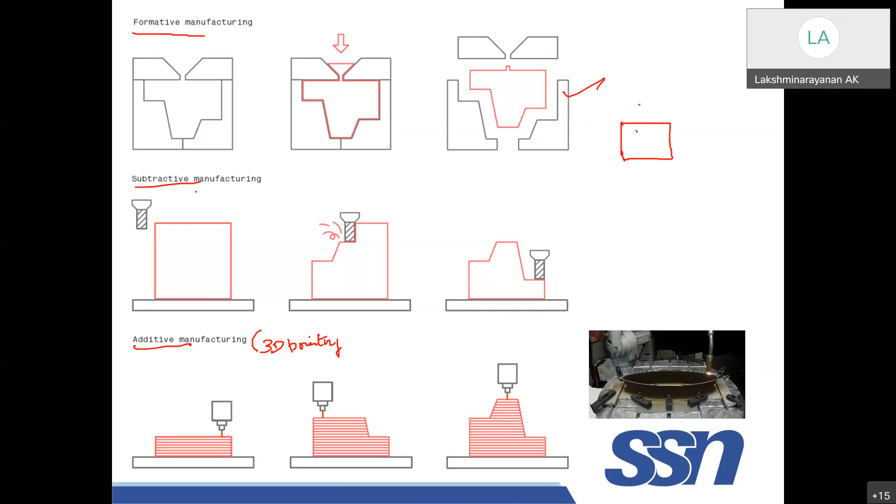Subtractive, you will take a bulk material like this. You will be using a tool and just remove the excess material, whatever you don't want to have. Suppose these areas, the material is being removed using a tool, right? Usually this is a milling cutter, which is used to remove the excess material, right? Whatever the profile you want, you just remove the excess material. This involves a lot of scrap, right? There is a lot of waste, which will accumulate.

For example, if you take magnesium alloys, suppose I want to fabricate a component using a magnesium alloy. If you have a lot of scrap material, there is a problem. Especially magnesium alloys will catch fire when in powder form. So retaining the scrap itself is a big issue, in addition to the waste production.

Whereas in case of additive manufacturing, as you heard a lot about 3D printing in the last few days, we will be constructing or fabricating a product layer by layer, just by programming the path of the tool. You will melt the feedstock, which may be powder or wire, layer by layer to construct the material. Though it is called near net manufacturing, you will still have some waste, but it is so much reduced. That is the advantage of 3D printing or additive manufacturing.

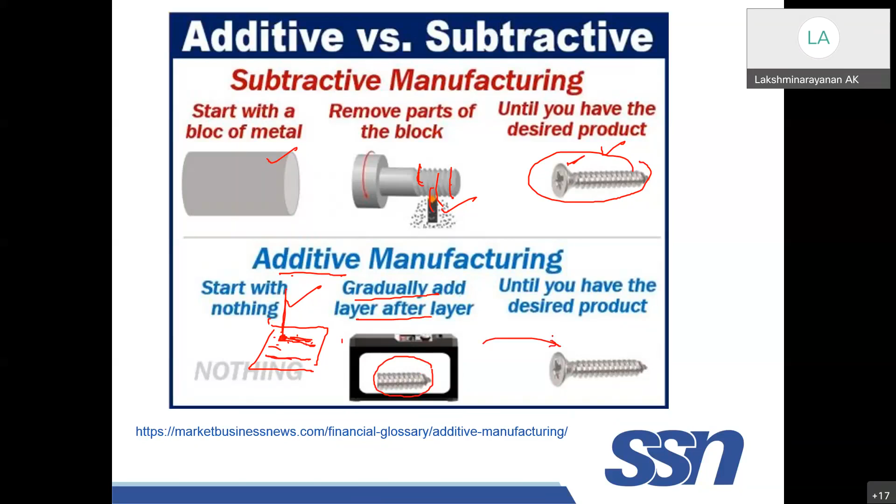But in case of additive manufacturing, you start with nothing. You have a substrate over which you can place some powder and melt it using a laser; that is called laser powder bed fusion. Or you can also use some kind of wire, which is melted and deposited as a layer. Gradually you add layer by layer until you end up with the product. That is why, adding layer by layer, it is called additive manufacturing.

If you take the volume of research done by researchers, most of the additive manufacturing papers available are majority on non-metallic materials. Non-metallic materials are very common, but in recent years people have started, and it is gaining importance for metallic materials.

If you take metallic materials, there are four categories: powder bed fusion, directed energy deposition, binder jetting, and sheet lamination.

In powder bed fusion, it's very simple: you have a cavity, you put some powder, and use a laser to melt a layer. That layer is melted, then you spread more powder on the next layer and melt it again, constructing the part layer by layer. Here the source may be laser or EB, electron beam - a beam of photons or electrons can be used for melting. The feedstock here is metal powder.

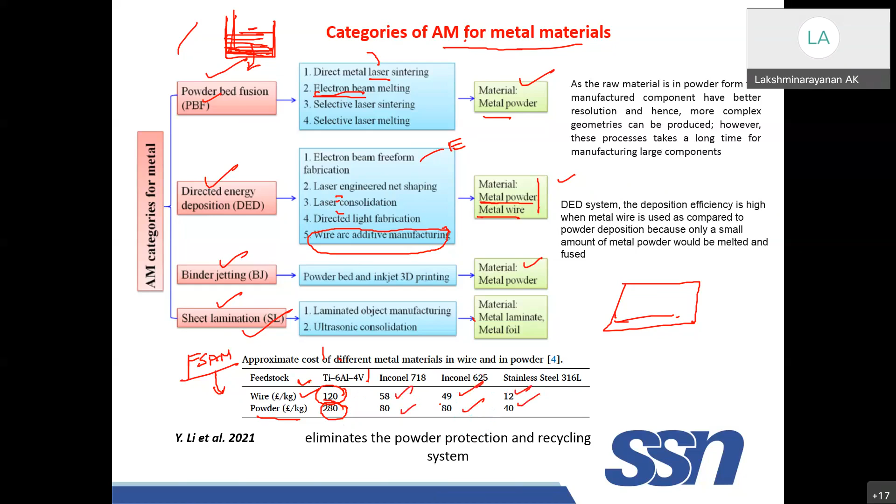Similarly, in other alloys also, the powder cost is so high when you compare the wire. Not only the cost, but also the recycling. When you produce the powder, the energy spent during powder production is so high. So the deposition of wire will be somewhat better.

So if you see, there are several techniques. If you want to compare these processes, you have to consider two factors.

One is deposition rate - how much gram you are depositing per hour, right? This is in the y-axis. And minimum feature size - what is the feature size you can fabricate? If you consider this area, this quadrant, up to this point, you can

use powder bed - you can use laser source or electron beam. Since you are using powder and a very concentrated source, the feature size also is somewhat less. The deposition rate also is less when you compare to other processes. But the surface finish will be very good - that is the advantage in case of powder bed fusion.

In case of laser LMD also, somewhat it is higher. Arc based, you can still go for a higher deposition rate. The feature is also bigger size. And there are other welding techniques in which you can deposit more - you can do large scale manufacturing. Large deposition is possible in case of arc welding, and the feature size is also very big.

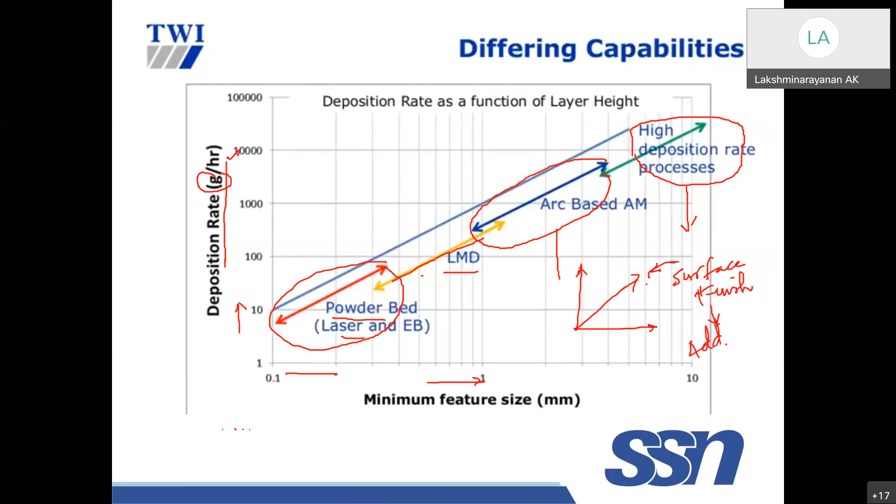But when you increase the feature size, and if you go this way, as in the diagonal, your surface finish becomes somewhat poor, and you need additional machining. That is one of the drawbacks of high deposition rate.

Wire arc manufacturing - I will concentrate more on wire arc additive manufacturing initially, then I will move on to friction based additive manufacturing. If you take wire arc additive manufacturing, it comes under directed energy deposition process.

In this case, we will be using a metallic wire, which will be supplied at a particular rate, a constant rate that we can vary and play with. Here the metallic wire will be completely melted, and it will be deposited on the previous layer. That means, initially this is the substrate, so the initial layer will be deposited using a wire, with a heat source, with the arc.

Maybe, based on the welding process, your wire will be melted - the arc will be created between your wire and the substrate, or sometimes between your non-consumable electrode and your substrate, and the wire will be fed externally. That we will see.

So wire arc additive manufacturing means you will be using a wire, you need an arc source, a heat source by means of any of the welding processes. So this wire will be melted and it will be deposited. First layer will be deposited, then again the torch will be lifted up, and another layer will be deposited. Like that, you can keep depositing.

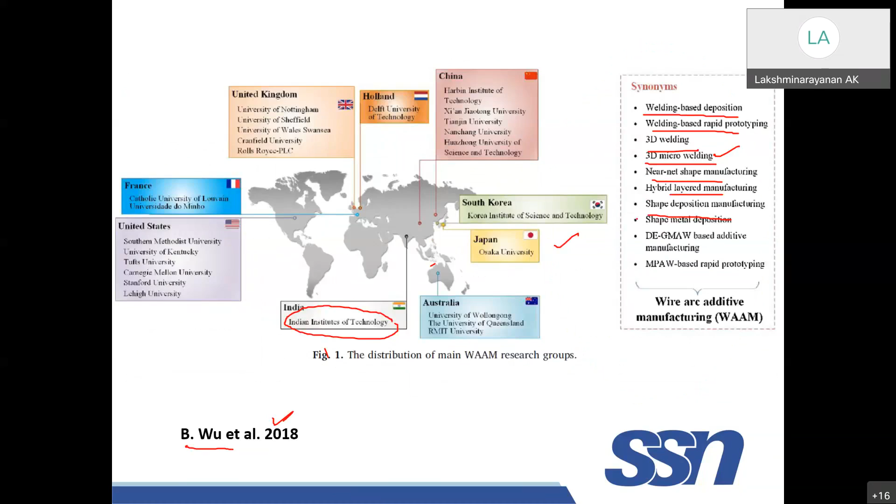Later, initially we will try to understand what are the variants of wire arc additive manufacturing.

At a later stage we will see solid state additive manufacturing techniques like rotary friction welding based, linear friction welding, friction surfacing, friction deposition, and friction stir additive. This is very popular now with respect to the product. Additive friction stir is a patented process by Aeroprobe. Now there is a company called Meld who are also working on that. We'll see that.

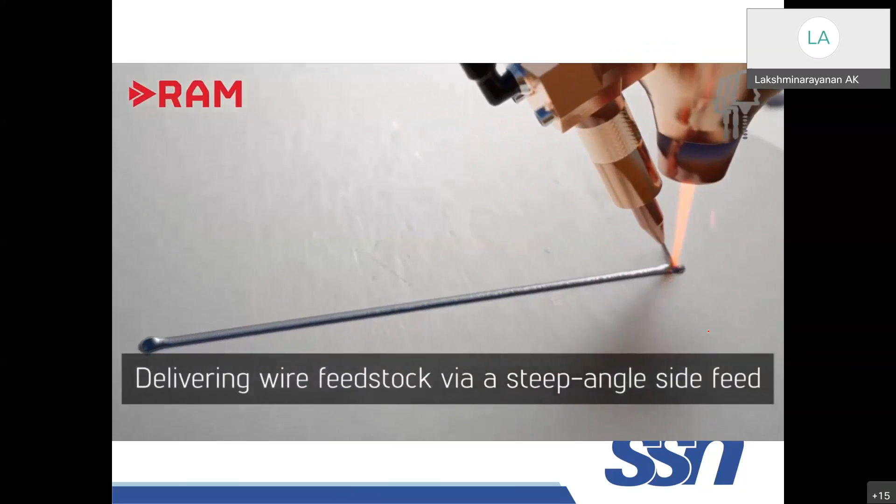So this is a laser. The wire is fed here, and with the laser they are able to melt it. This is initially a multi-track single layer. Once the single layer is over, if you want to build continuously, you can build it.

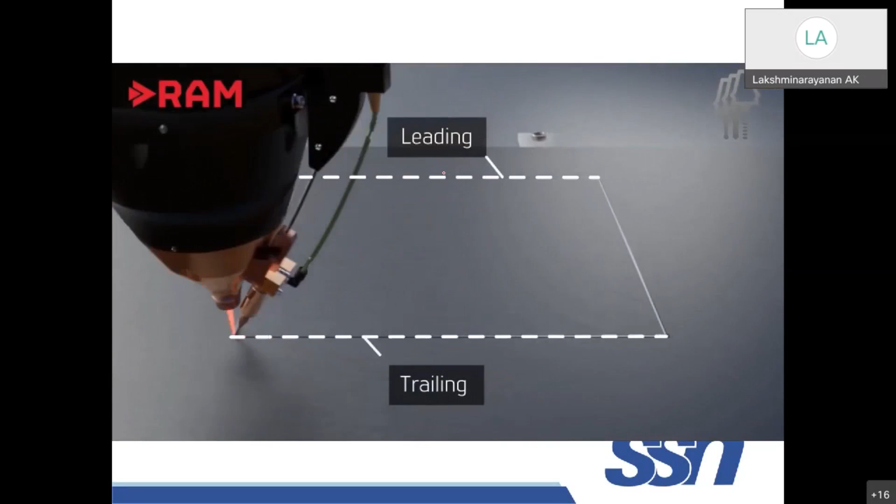So your wire is fed. This comes under directed energy deposition. We will be using laser to melt - the heat source here is laser.

You need to decide what overlap you should have, because between tracks, to avoid porosity, usually the overlap is provided.

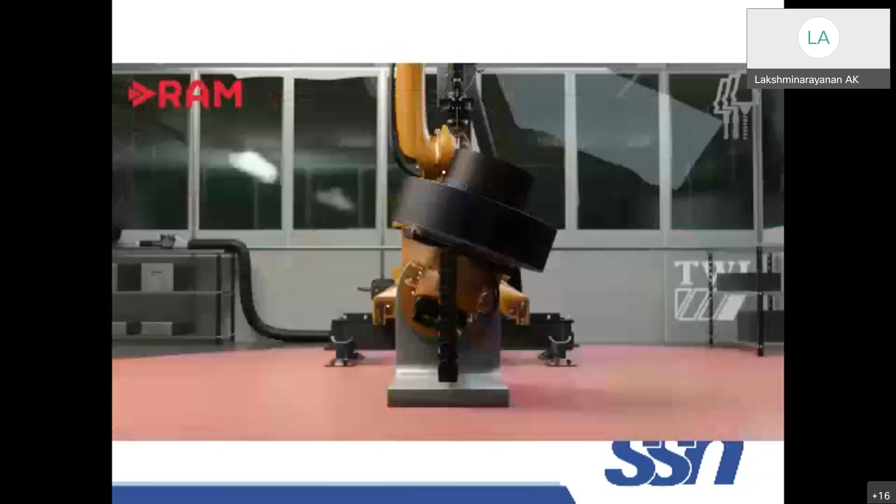For any contour shapes or any shape you want, you just prepare a CAD model, create the path, then you can move the laser source wherever you want, whatever shape you want.

The problem here is that if you use laser or electron beam, the energy used will be very, very high compared to arc power. That is why people want to use the WAAM process - wire arc additive manufacturing. That is one reason. Another is energy consumption: compared with laser and electron beam, it is 1/10th of laser and 1/30th of electron beam generator. That is one of the biggest advantages of WAAM when you consider economy.

The other aspect is large metal deposition is possible - the deposition rate is very high in case of WAAM. That is also another advantage.

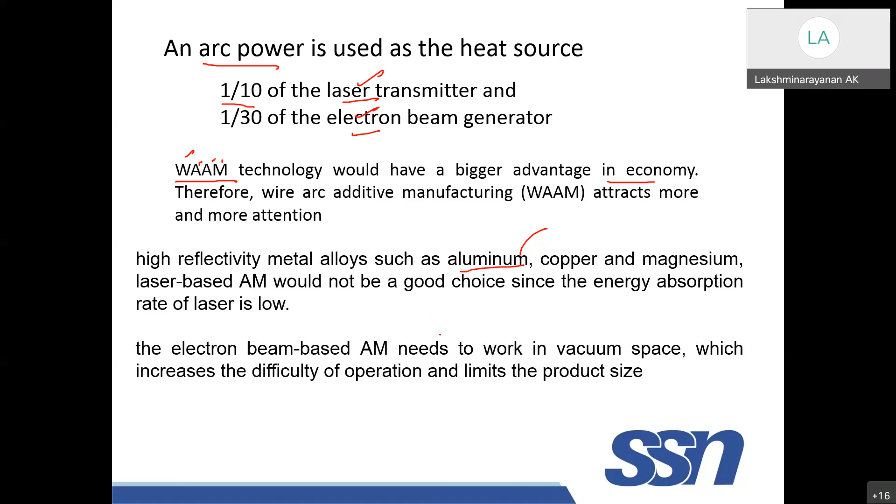One more thing is if you consider material aspects - aluminum, copper, magnesium - because of their reflectivity, if you want to use laser, the laser energy should be absorbed in order to generate heat. Unfortunately aluminum, copper, magnesium are all highly reflective materials, so laser is not a good choice for these. Also with laser beam or electron beam, you need a vacuum space because air molecules will interact with the electron beam and disturb the beam path, making it difficult to operate, especially restricting the size of the product.

For arc selection, there are several arc processes, starting from gas metal arc welding. We will see some pictures and schematics of that - I will try to explain it because there may be students here.

The requirements for why you want to go for an arc related process: you need relatively high deposition rate, low heat input to the substrate, and a stable process. Based on this we can select among gas metal arc welding, gas tungsten arc welding, plasma arc welding. We will see one by one.

If you see the arc welding sources, these are the four processes very commonly used - one is gas tungsten arc welding. The schematic you are able to see here is actually a GMAW process; maybe in the next slide I will show the GTAW process.

In case of gas metal arc welding, you have a wire which is fed continuously, and the arc will be initiated between your wire and your workpiece. This continues, and the wire will be melted and deposited. Your wire is fed coaxially within the torch - external feeding is not required because the arc will be initiated between your wire and your substrate.

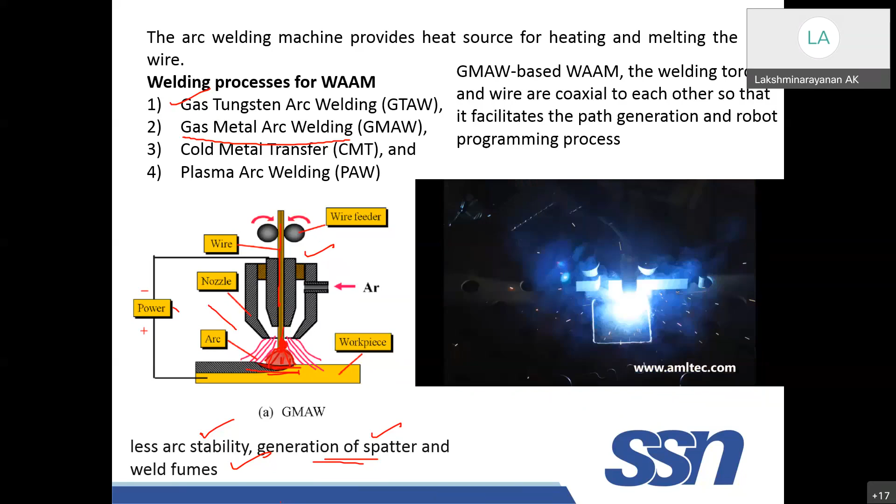I'll just go back and play this video again. This is the GTAW process, where you will be using a tungsten electrode, which is a non-consumable electrode. In the previous case, GMAW process, we used a consumable wire, and the arc was struck between the consumable wire and the substrate. In this case, the arc will be struck between the non-consumable tungsten electrode and the substrate.

Here we are feeding the wire externally. That is the difference between the previous process and this one. I'll play this video again. See, the arc is coming, and there is an external wire fed from the front side, that is front feeding. The advantage of this system is, since you are feeding the wire from an external source, you can control the heat input and filler addition in a better way compared to the SMAW or GMAW process.

Also, the wire feed direction and position can be modified. In some cases this is beneficial, in some cases it creates problems. But the advantage here is you can use back feeding, side feeding, and front feeding. Here it is front feeding, they are feeding from the front, it is moving in this direction. This is also possible from the back side, or suppose this is your torch, this is your tungsten electrode.

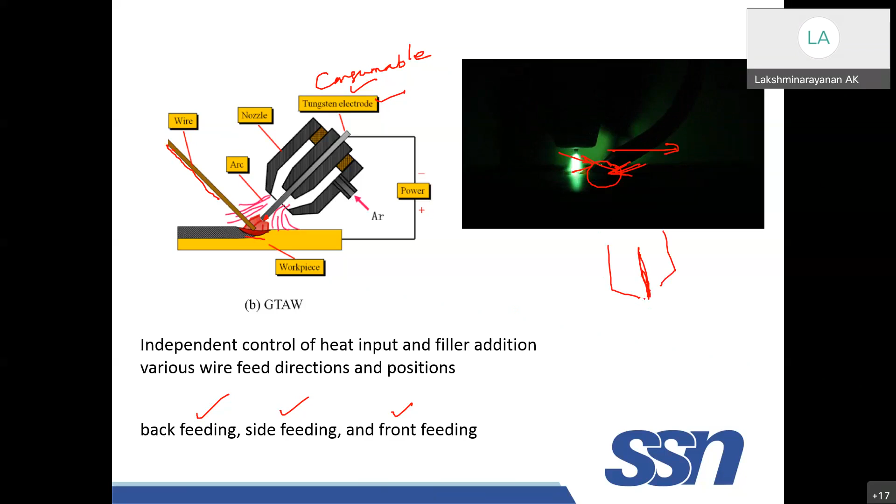You can also feed it from the sideways. So this is the front side, we are seeing from the front. Actually this is a side view. The feeding here is from the front side.

This is one more video. You can see here the wire is feeding from here. Now you see this is the substrate, no, this is the first layer already melted, and you can see the second layer. You can see the liquid metal here, right?

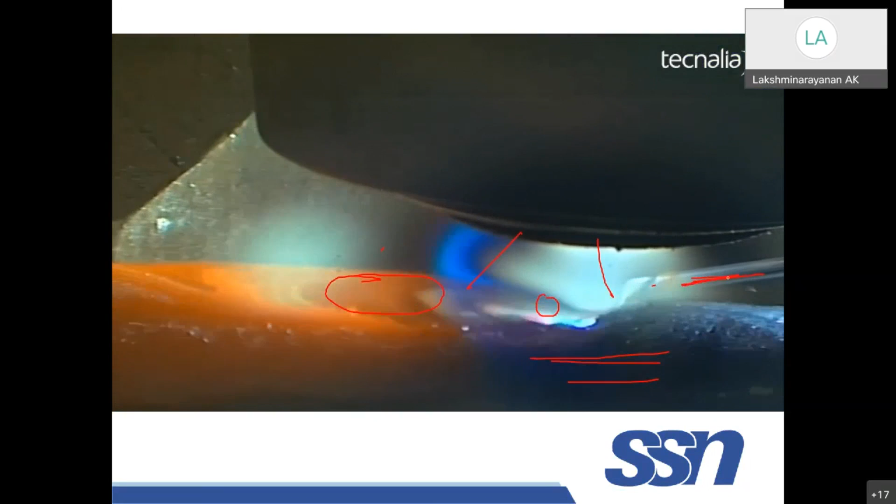So this is your GTAW arc. You can see the wire feeder here, the wire is fed here, it is being melted here. I hope you are able to see, here it is being melted. This is in the longitudinal direction.

This is the first layer actually, whatever the layer. And this is the actual setup, this is your work table. You can either move the torch or you can also move the table, depending on the machine you have. Either you can use a robot.

When you use a robot, most of the time the torch will move. If you use a CNC table, usually the work table will move. You can have these processes, but they don't provide self shielding, so we have to provide shielding gas in order to avoid oxidation.

This is the arc, it will move in this direction. This is from the wire feeder, the wire will be fed into the arc, exactly in the arc column, so it will be melted and deposited. You have to use cooling also from the back side so that undesirable microstructure can be avoided.

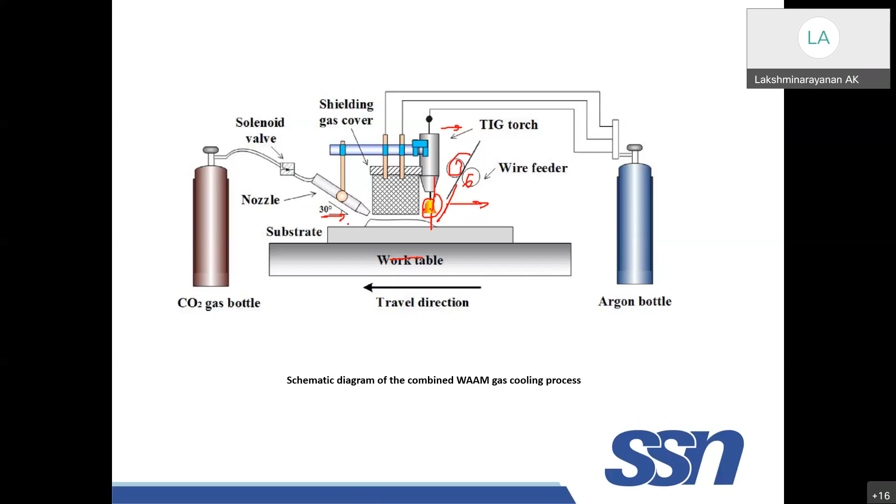You can also use plasma, this is plasma arc welding, that also you can use. The difference is, in case of gas tungsten arc welding, your nozzle, the nozzle cover is this. I will just draw it like this. This is your tungsten electrode, which means...

This tungsten electrode is projecting outside, so your arc will diverge like this. Whereas in case of plasma, your arc is constricted, because your tungsten tip is inside this nozzle. Thereby this arc is constricted. There is no restriction here for the arc, but here you have a restriction.

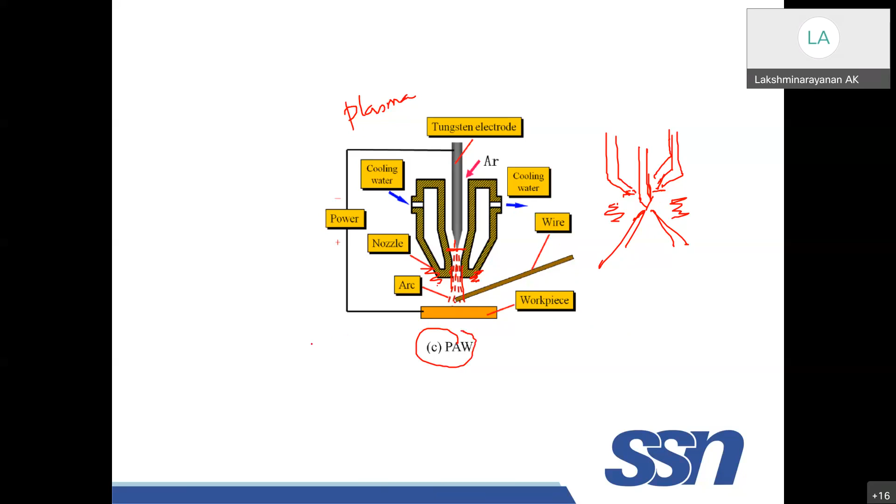So this process, you can also use these processes. Laser and plasma arc welding, they are all high energy density processes, so you can still use this for additive manufacturing. You may use GMAW, you may use GTAW, gas tungsten arc welding, or plasma arc welding. All these three are very popular. There is one more variation which we call CMT, cold metal transfer.

We'll see the mechanism of that also. So if you consider the whole system, these are the components of the WAAM system. You need to have a welding machine initially. You need to have a controller which will give feedback to the computer.

The sensor, whatever the sensor, can measure temperature, or sometimes even vibratory signals, acoustic emission signals also you can record. Those signals will be sent to the computer as feedback. Based on that, you can modify the parameter using this controller, which will modify the parameters in the welding machine, so that whatever desired condition you want, you can modify it.

So the welding machine is connected to the robot system, so that based on whatever program you have written, this robot will move. This axis, the robot will move and it will deposit. So this is a GTAW machine.

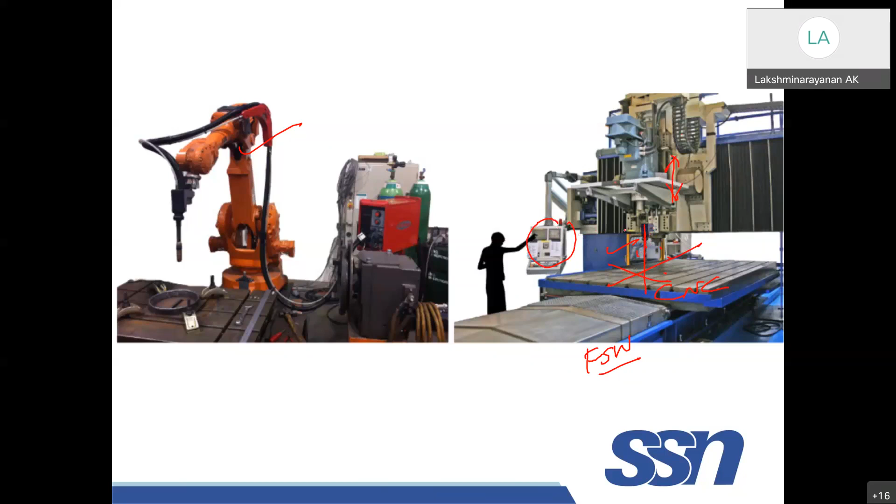This is one way you can do the WAAM process, and this system is usually used for friction stir welding, a solid state process, just modified. It's a CNC system. All these axes, the table will move. This will move, the tool head will move this way, whereas the X and Y axis, the table will move. Just based on the CNC programming, instead of the FSW tool, you fix the torch here and you can deposit. So these two possibilities are there to manufacture components by wire arc additive manufacturing.

You can also use hybrid processes like GMAW and GTAW, both together, to improve efficiency.

There is another process which we call cold metal transfer welding. In this case, it is a modification of the GMAW process developed by Fronius company. So in this case, there will be short circuiting. Once the wire touches, there will be short circuiting. This droplet will come, once it spreads, the wire will be retracted.

I'll just clear it and play this video so that you will try to understand that. Yeah, second, I will just play this.

Sir, can you share the links also, because right now our class is also going on, so daily we are not able to attend these sessions.

Hello. Sure, we'll share the recording video. Okay sir, thank you sir. Yes sir, you can continue sir. Yeah, thank you sir.

See, here once the material has contact, there will be droplet formation because of short circuiting. Then the wire is retracted so that it will lead to the droplet which will be transferred to the substrate. I'll just play this video here, the right side one, you can see how it works actually.

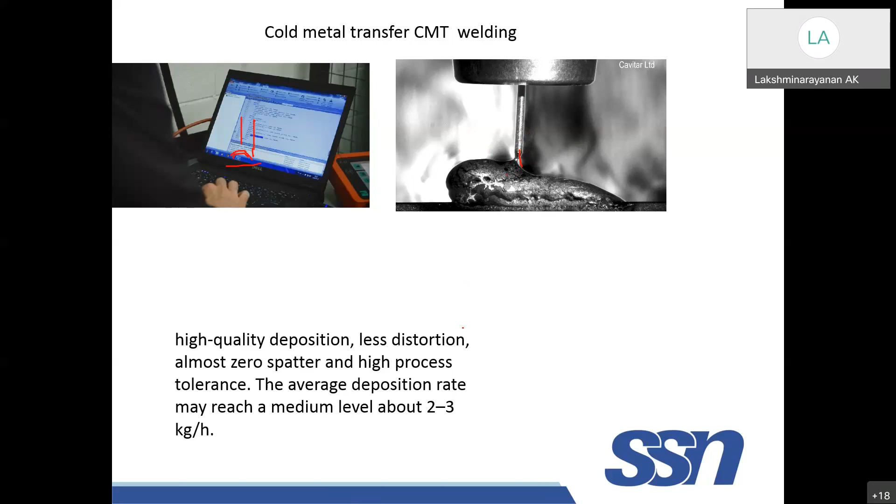The advantage of this deposition is high quality, with almost zero spatter. When I showed that video on GMAW, a lot of spatter was there, right? In this case, there's droplet transfer, droplet short circuiting transfer, so the spatter is almost negligible or so much reduced. The average deposition rate is somewhat 2 to 3 kilograms per hour.

Okay, this is cold metal transfer. This is another application of cold metal transfer - how a complicated or complex geometry you can still fabricate, right?

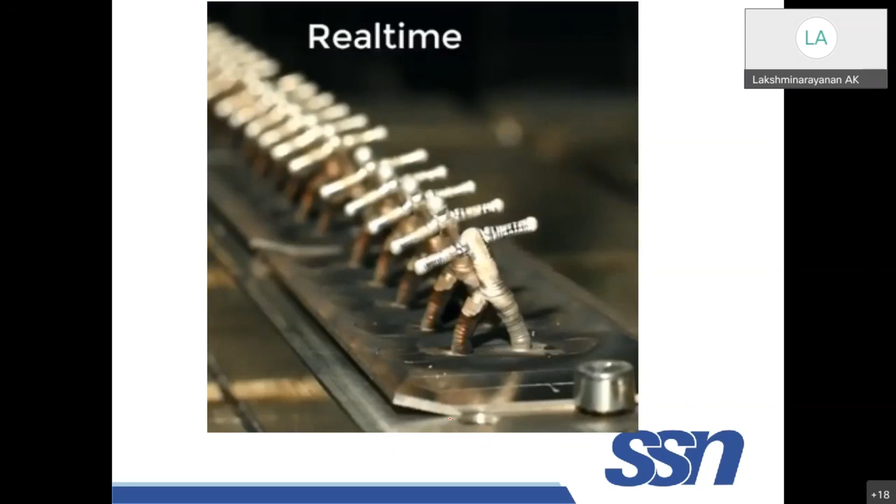See here how it is. This is one variation of CMT, called pulsed CMT. This transferred, right? It's a droplet transfer, you can see that. This is one of the variations by which you can even create complex products, right?

Arc additive manufacturing, whether it is near net shape manufacturing, depends on deposition rate, accuracy, and surface finish. As I mentioned in the initial slides, there is always a compromise. If you want to produce large parts with high deposition rate, the dimensional accuracy is affected - dimensional control is somewhat difficult, as I mentioned in the beginning. Similarly, for small parts, you will get very good accuracy, but at the expense of productivity.

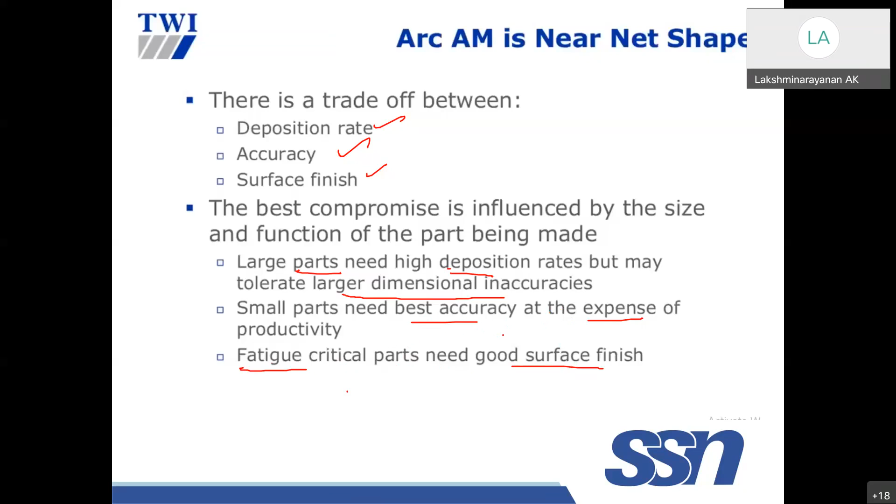The time requirement will be very high in case of small parts - if you want good accuracy, the productivity will be less. That is the drawback. But it depends on the application for which you want to use these components. Especially if the components will be used under fatigue loading conditions, you need very good surface finish, as we know fatigue failure always initiates from the surface. So your surface finish must be very good if you want material with good fatigue properties, right?

So if you consider the approach of how to build the bead, people have used several techniques. I have taken this from the TWI website and this data - you can fabricate beads this way. See how will you do that?

Suppose if I want to produce a component like this - so what I will do is deposit a layer. I will move the torch this way, so I need to create the path for this. Path planning is a very important step in additive manufacturing. So either I can start from here, go one pass, move again, come here, start here, again come here - like raster scanning. I will just do that. This is layer 1.

Then I will start from here - this is layer 2. Say this is layer 1, layer 2, layer 3, layer 4, like that it goes. So this way again it will go - I will start here and like that I will go. This is layer 1, and this way I can do that. Or I can also reverse it, right?

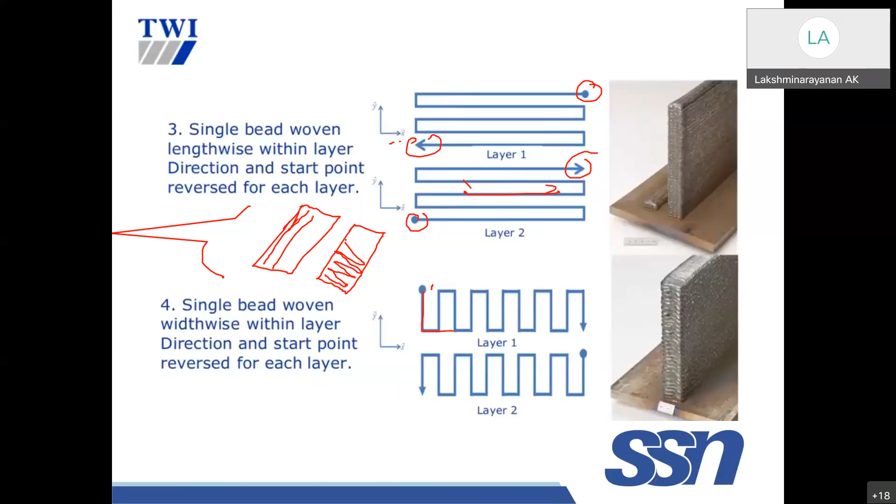That is why people try different paths - during the path planning itself, various paths have to be tried, and we have to finalize a particular path based on the peak temperature or temperature profile, which will subsequently influence the microstructure, residual stress, and distortion. That is very important, which is why path strategy is very important. So far in the literature, just to have some idea what materials have already been tried by various researchers using different arc welding systems.

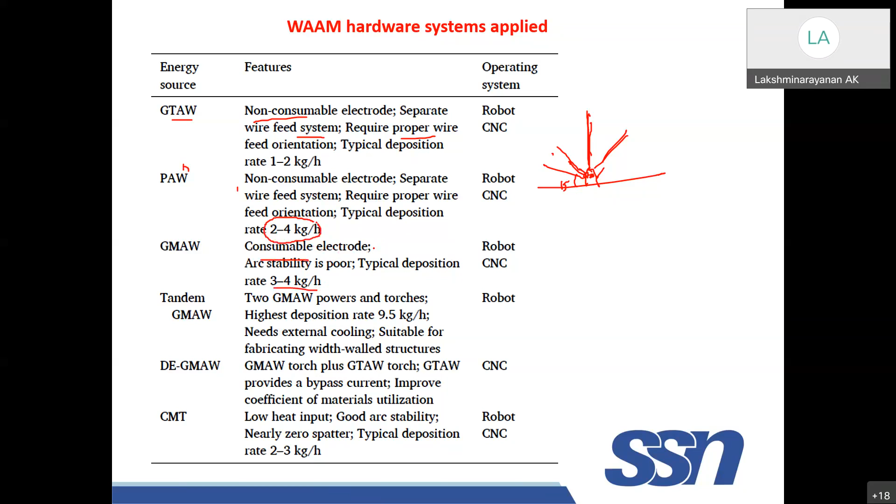So again plasma, same thing. Since it is a high energy density process, almost the deposition rate is somewhat higher, 2 to 4 kg per hour. GMAW, it is very high, because the production rate, deposition rate will be 3 to 4 kilogram per hour, because you will be using a consumable electrode. That's why the production is very high.

You can also use tandem, two GMAW torch powers and torches. The deposition rate, if you see, is much higher, 9.5 kilogram per hour. So you can use, as I showed in one of the pictures, a combination of GMAW and GTAW, which provides bypass current, and material utilization, how it is being melted, will be improved.

CMT, as I mentioned, is a low heat input process, because this wire is retracted after the droplet forms, this will be retracted. So further heating is not there for this liquid metal. So this is a low heat input process as you compare to the GMAW process. So good arc stability is there, almost zero spatter. The deposition rate is around 2 to 3 kilogram per hour.

But in few cases like titanium and aluminum, there may be a problem of arc wandering. The arc is not able to get stable. It depends on material again, but for most materials CMT is good for the WAAM process.

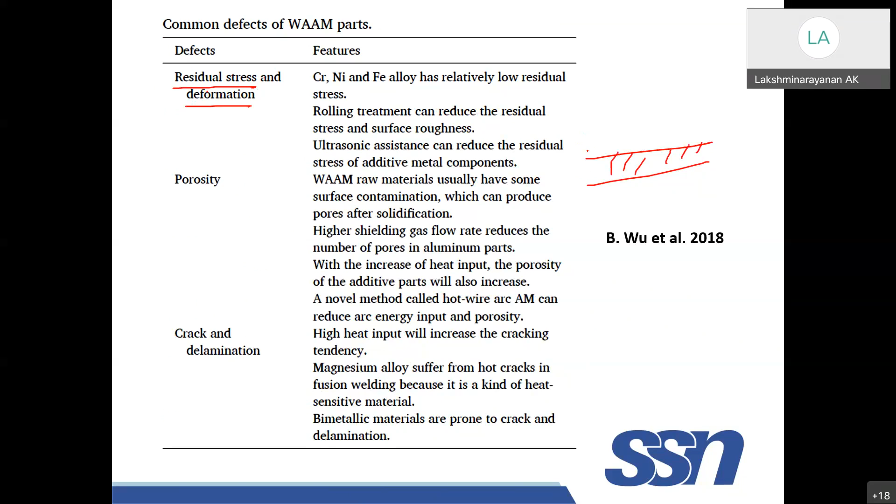What are the defects which will be there in case of WAAM? The first problem is residual stress, the stresses which are built within the material. That is because if you deposit a layer, suppose this is a layer deposited initially, and I deposit another layer, some of the already deposited layer will be melted again, and it will be at a particular temperature, not at room temperature.

It will be undergoing cooling, there will be an interpass temperature, then again another layer like that. There will be accumulation of heat. So that causes sometimes the stresses built within this material, which will be exceeding the yield point of the material.

If the residual stress built within the material exceeds the yield point, the material will undergo deformation. Suppose I want to have a particular shape, but unfortunately, because of the residual stress, I will end up with a deformed structure. So to avoid that, usually what they will do is a rolling treatment. I have a video for you. After a pass, they will do a rolling, which will induce compressive residual stress. See, there is the residual stress.

You have two nature of residual stress. I hope many of you know, tensile and compressive. Tensile is not good for us, because tensile will always tend to open a crack.

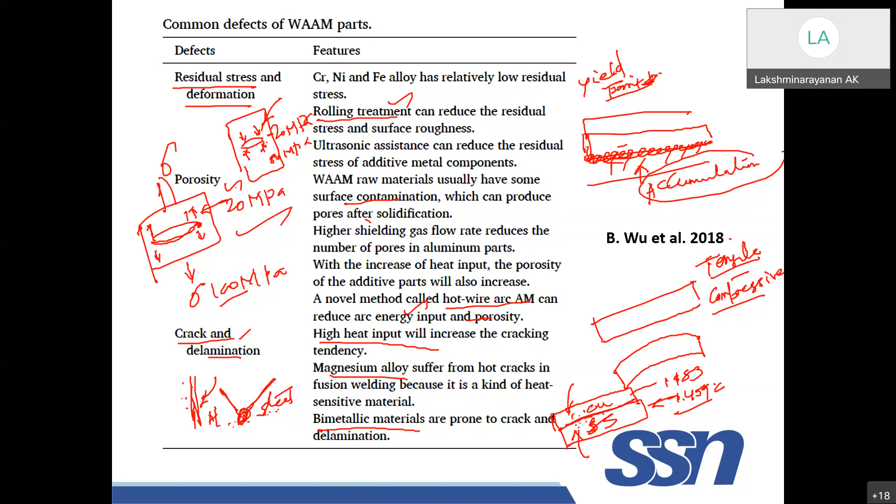The copper will not adhere properly to the stainless steel if the melting is not proper. So these are some common defects, and we cannot generalize this - it depends on the material. That is why this graph is very important.

Deformation is one problem caused by residual stress. Porosity is another problem, you can see porosity here. Surface finish is very important, depending on how much deposition you are doing. You can see crack here too. Oxidation is also a problem at high temperature, as some materials undergo oxidation. Delamination between layers means there will not be proper bonding.

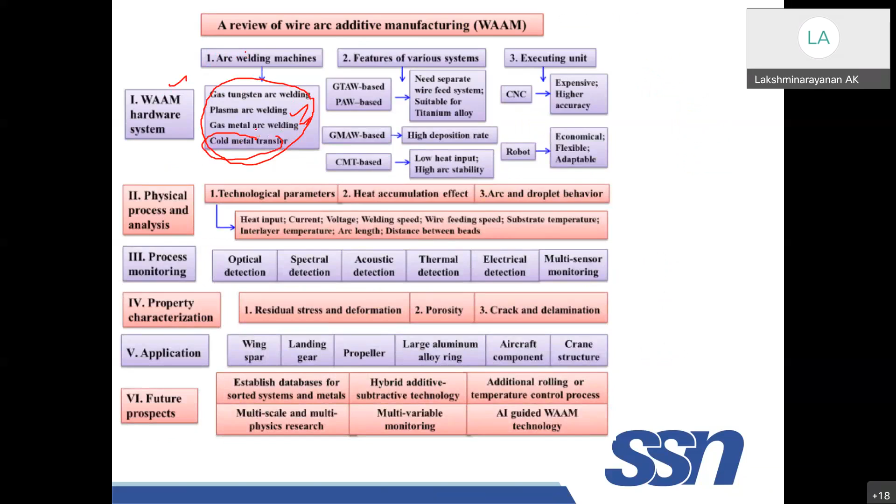So to review this, what we have here is a WAAM hardware system. Basically, it depends on four welding processes: gas tungsten arc welding, plasma, gas metal. Cold metal transfer is nothing but a modification of the GMAW process. In case of GTAW and PAW, you need a separate wire feeding system, that you have to remember. In case of GMAW process, higher deposition rate is possible.

In case of GMAW, the arc stability and spatter problem is there. CMT has low heat input, and especially since you are retracting the wire during the droplet transfer, the stability of the arc is very, very good. For the executing unit, you can use a robot or CNC.

As per the literature, CNC is always expensive but gives higher accuracy. Robot is economical and it's flexible to adapt. Okay, this is with respect to the WAAM hardware system.

Hardware system, physical process — if you take parameters, these are the parameters: current, voltage. You all know when you do welding, right? Welding speed, wire feeding speed, substrate temperature, interlayer temperature, arc length. Arc length is very important, right?

How much wire — if suppose this is your torch, what is the length here, right? So distance between your beads, okay, distance between your beads — maybe suppose if it is a single layer overlap, okay, one layer if you deposit, next layer you have to deposit just adjacent to that, how much overlap you need to provide, that is what distance between beads means.

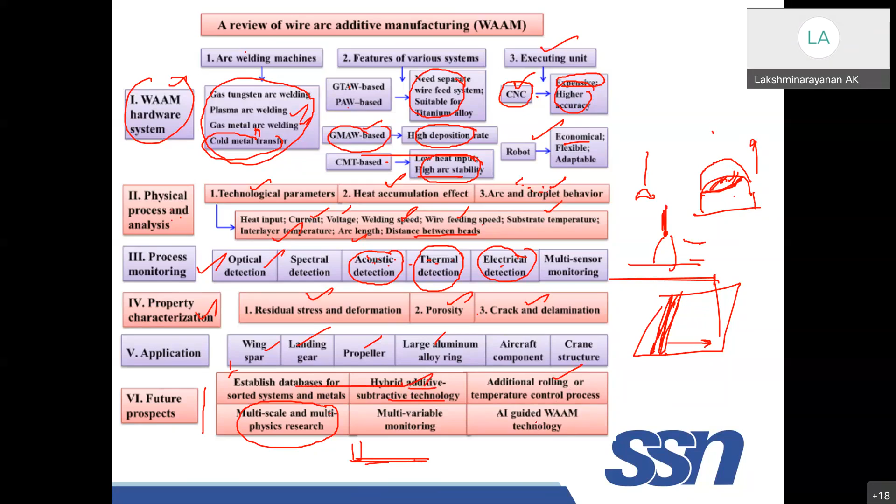I'll just show you. Okay.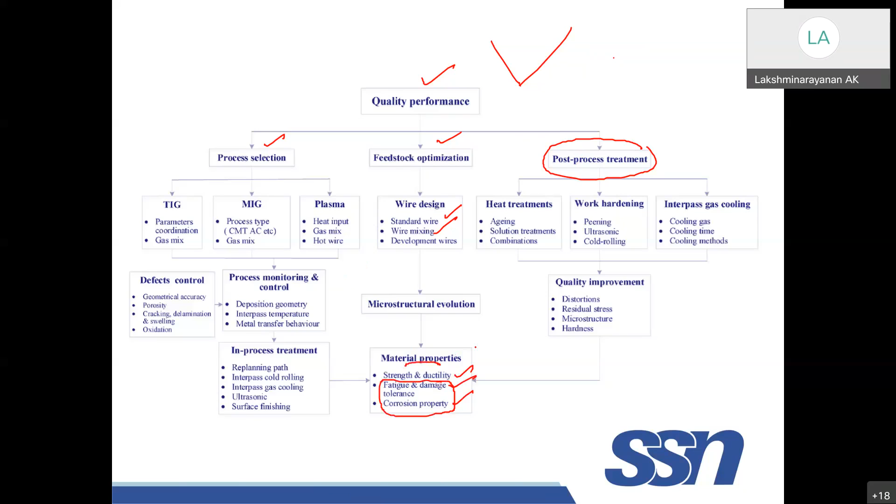Okay, this we already discussed. I just want to skip this.

This note slide shows various defects with respect to the material fabricated by the wire arc additive manufacturing process, and the processes used here. Based on this, the plot was drawn, which I showed you. This is the process where you have an arc source which is moving, followed by a roller, so there will be some kind of loading. Now it is moving, and the roller will come. This is a deposit, on the second layer. Now the roller comes here, still in hot condition.

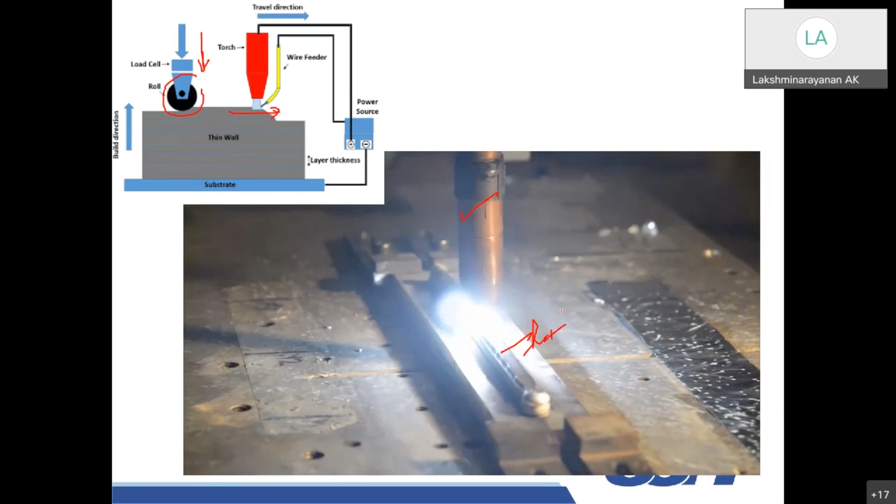This is a hybrid process, right? You need some additional setup. Initially your arc is depositing material, then it is followed by a rolling. That is one of the hybrid techniques you can use to improve the properties of the fabricated product. These steps continue layer by layer, and for each layer we have to repeat this.

So these are some of the products by Cranfield University and Norsk Titanium Company. They have fabricated a wing spar and landing gear. Just imagine if you had to prepare this by a machining process, what would you have to do?

Take a big structure, a big large material like this. Then you have to do machining here, machining here, and machining here. That is the problem, right? Lot of material saving you can do compared to considering casting and machining, where you have to do a lot of machining. That is not required here. That is the advantage.

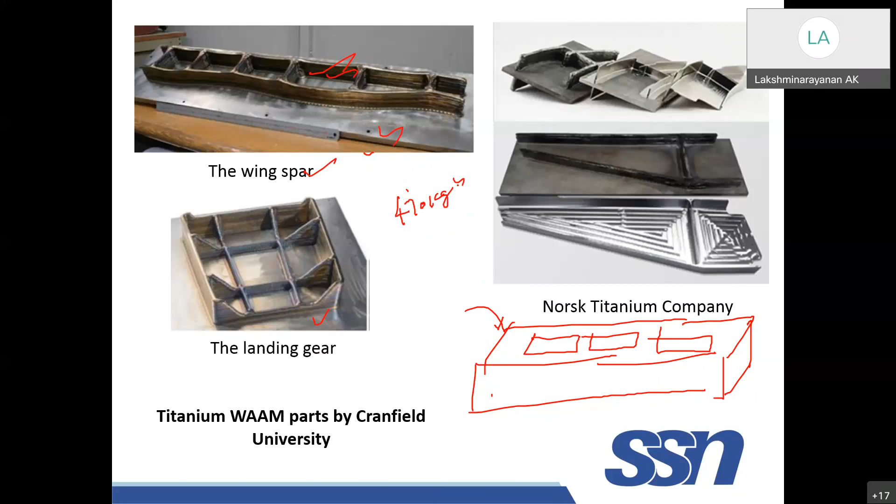Many literature sources say, for this case, around 470 kg was saved compared to conventional machining. These are some components by BAE Systems - a high strength wing model, this is a hollow structure, and a mild steel truncated cone. That is also possible.

So I'll just play this video. It's not playing, wait a minute. So these are some of the components. You just program the path, and you can see this is GMAW. You can see a lot of spatter coming out.

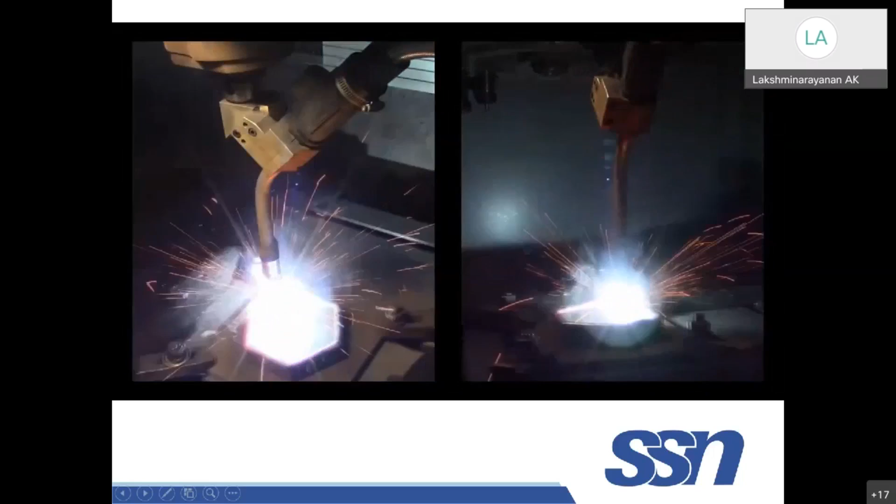So now they are doing machining, using an end mill cutter just to finish. I told you this is a hybrid technology - you can do machining between the process steps, or you can also do it at the end. You just finish it with an end mill cutter, and finally you get the finished product.

If you want to fabricate the same thing using conventional methods, see how much, how good this component is. So these are some components fabricated through the wire arc additive manufacturing process, just to give some idea.

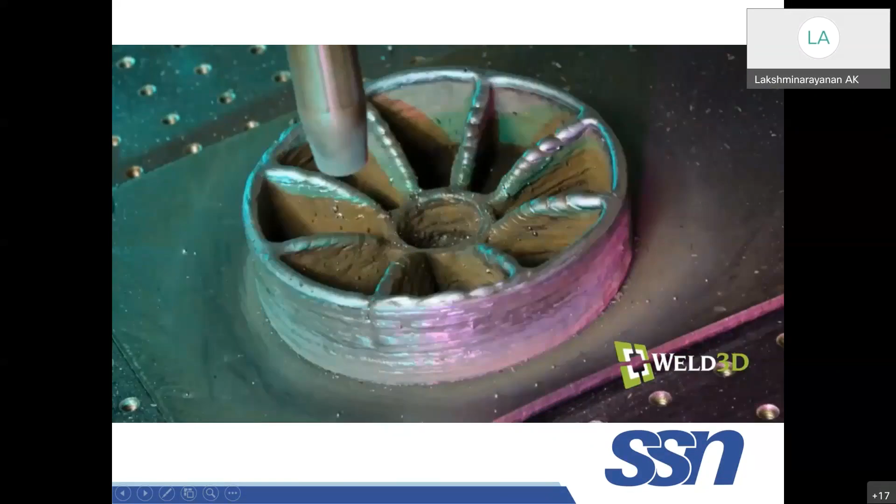So, right, the limitation we witness with fusion-based metal additive manufacturing - it basically uses powder bed fusion or directed energy deposition principles. But all these methods use fusion to melt the material, which ends up with molten pools. These techniques usually suffer from other problems - though you are able to produce the component, you always need to go for post-weld heat treatment, because there will be solidification related issues specific to a specific material. So that is one of the drawbacks.

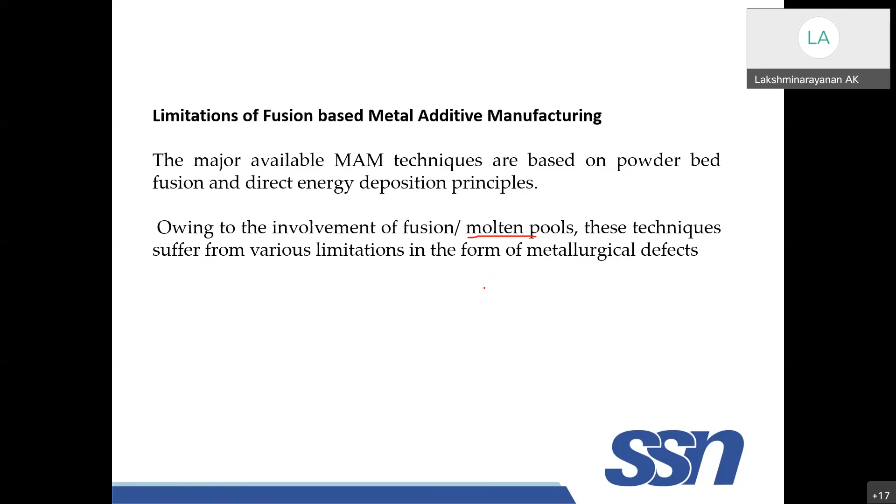That is why people wanted to try solid state techniques also. Solid state technique, basically, as I mentioned in one of the slides at the beginning of this lecture, you can use friction welding.

Friction welding itself, you can use rotary friction welding or linear friction welding. Also, you can use friction stir. There is a process called friction surfacing.

For students to understand, I will show some videos to explain the principle of the process. This is rotary friction welding. Here, if you see, this rod is rotating. This one is moving in this direction but not rotating. Because of the frictional contact between these two rods, we are applying force from this side.

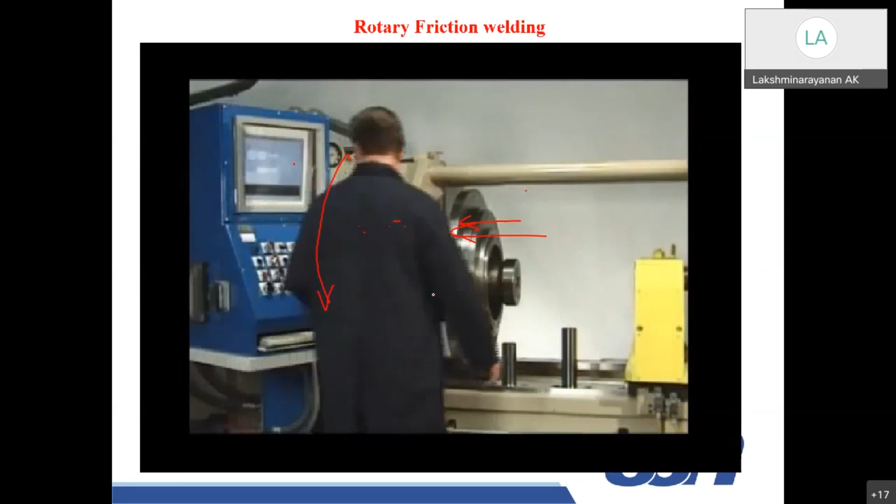He is inserting one of the rods here, and another rod on the other side of the chuck. It is similar to a lathe, right? No.

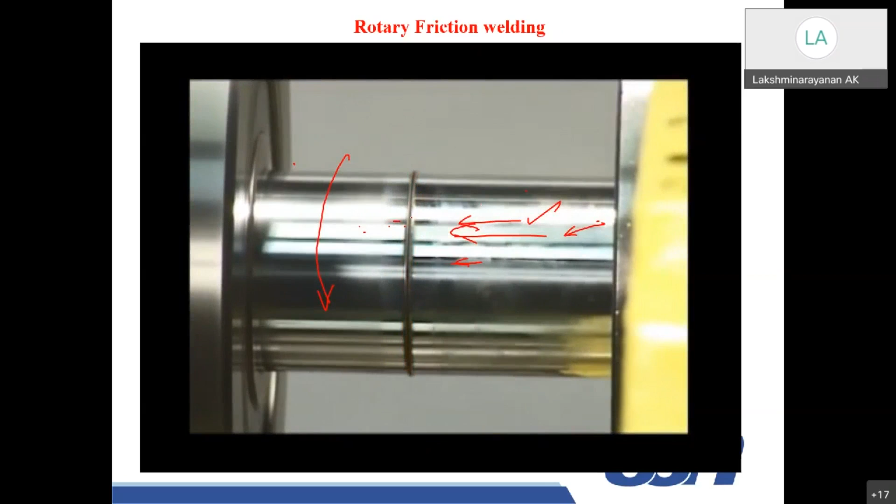This is moving. Initially there will be some contact, and there will be frictional heat generation. So then I'm applying some more pressure. There is a flash which is coming out, right?

I hope you all studied this in manufacturing. I don't want to spend more time on that.

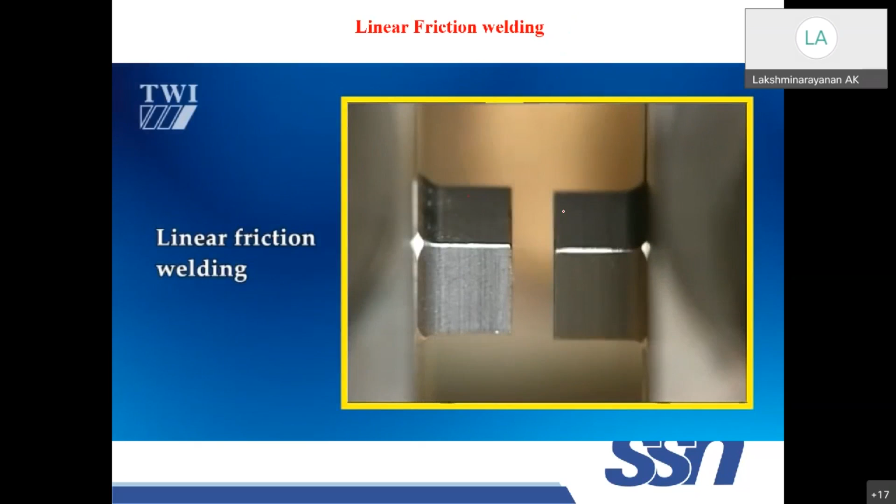This is linear friction welding. In that case, your rod is not rotating, right? In this case, it is oscillating. This one is stationary, and this one is oscillating in this direction. We will be applying force from this side.

I'll just play it again. Okay, this is linear friction welding, right?

The third one is friction surfacing. This is a substrate, and this is a consumable rod. We call it a mechtrode.

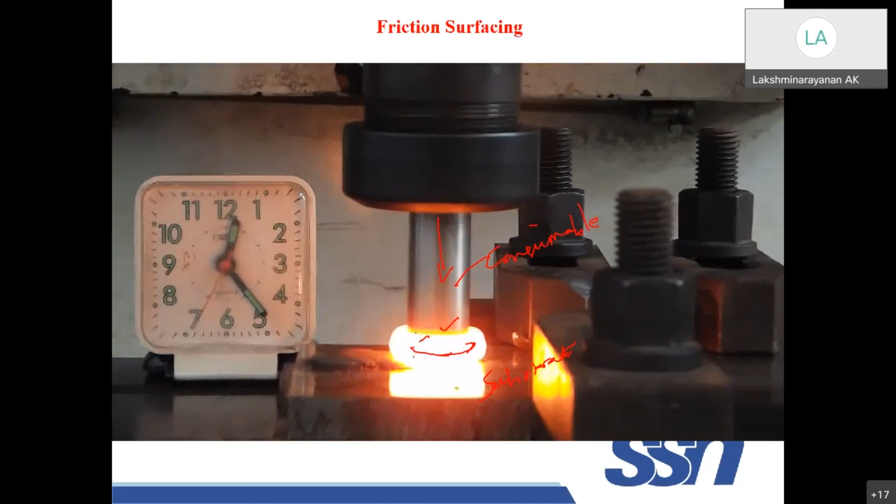We are applying force from the top, so because of that there will be frictional heat generation. The material will go to this condition. The temperature is around above 1200, so the material will be transferred to the surface. You can see the deposit is there.

This is the consumable tool which is rotating at a higher speed, around 3000 RPM. I'm also applying force from the top, so the material at the interface will deform. The only thing is the substrate should be harder than the tool. This is called mechtrode, the consumable rod is called mechtrode.

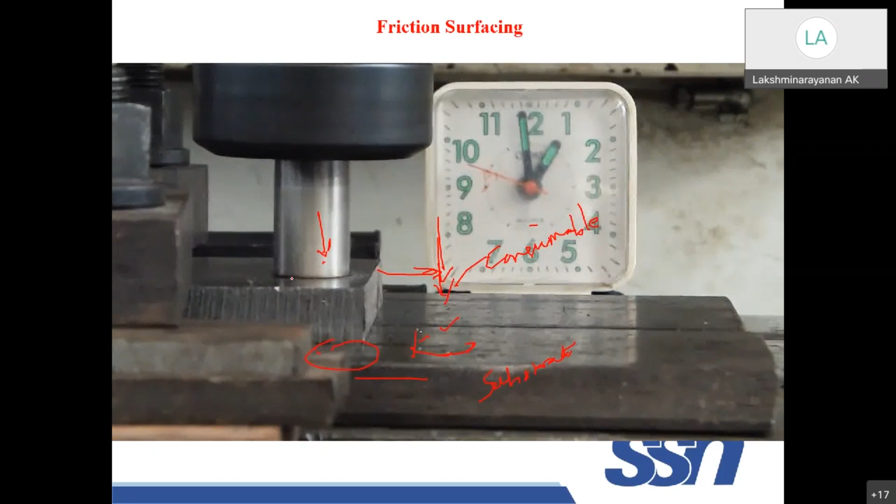See here, initially it is being plunged. You will have friction at the interface that creates a lot of heat. Once this undergoes that, it will go to the plastic stage. So your tool will be moved in this direction, and there will be a deposit.

The third and last process is friction stir welding. Here you have two sheets, two plates. You have a tool with two portions. One is called the shoulder, the other one is the pin. Initially, I will just plunge it inside, and the pin will go inside.

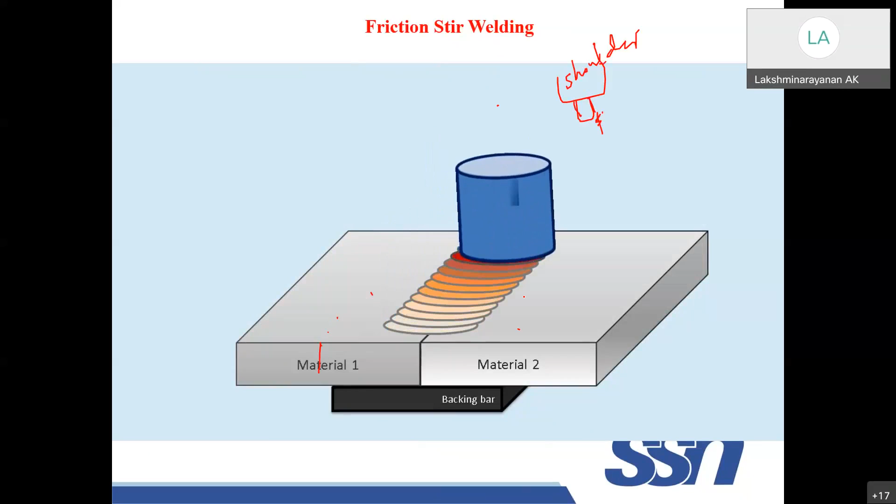Suppose I will just draw it here. I have a plate, two plates. Initially my pin is there, and my tool shoulder is there. This larger diameter is called the shoulder, and this one is the pin.

What I will do is try to plunge it inside this joint line. Once it goes in, how would it look? It will look like this - the pin will go here, and the shoulder will touch the top surface. These are the two plates.

Since it is rotating, you have pressure from the top. The material from one side will go to this side, and this side will come to this side. That will be mixed properly. Whatever material is beneath this shoulder will have bonding - you will get a bonding like this. This is butt configuration.

I can even join in lap configuration. In fact, friction stir additive manufacturing uses lap configuration. So I can use the tool here, just plunge it, stir it, so that I will get a bond here. I will try to show you that.

You just see this video. Initially, the pin is going inside, into the joint line. It is going inside now, into the butting line.

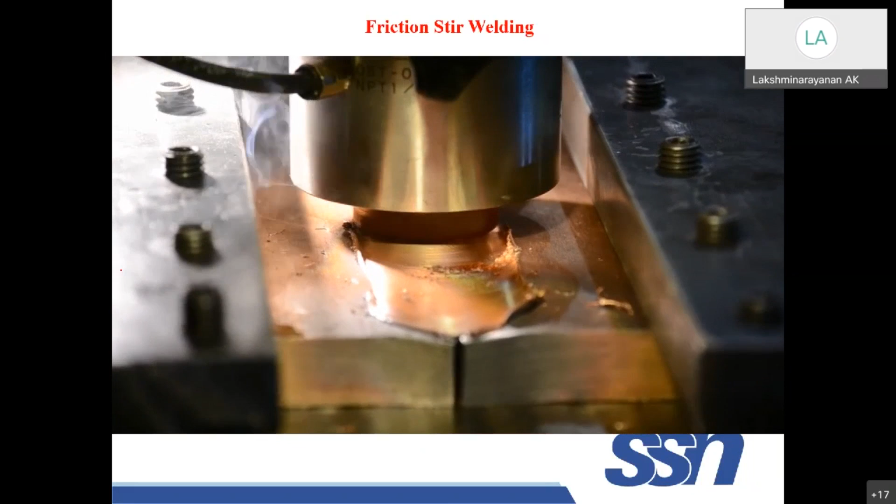This is a copper plate. That is why the temperature is going to this red hot condition. These two are copper plates, which are very difficult to weld by conventional welding process because of the conductivity and other issues. So distortion issues, but a very clean weld you can get in this case.

So using this process, especially, people have tried many aspects, like friction additive manufacturing. Here, they will take a substrate, just keep a plate there, a strip, and try to weld it - stringers assembly.

See, this is your main sheet or main plate. Place another plate here, strip, or stringer, and try to weld it here. Like this, again keep another plate and try to weld. You can deposit one over the others, stack the sheets, and weld it - that you can do by friction-stir additive manufacturing.

Linear friction welding, blade to disc, we call it blisk. This is called blisk for gas turbine applications. You can attach these discs to the blade.

Sir, after the welding, we have to do machining? Here you need not have any machining - it's a direct deposition. Might be a small cleaning you may require. Since we are putting one layer, then welding at a certain desired place, and then putting another layer, the layer is of different size, so in between you may require to slightly finish it.

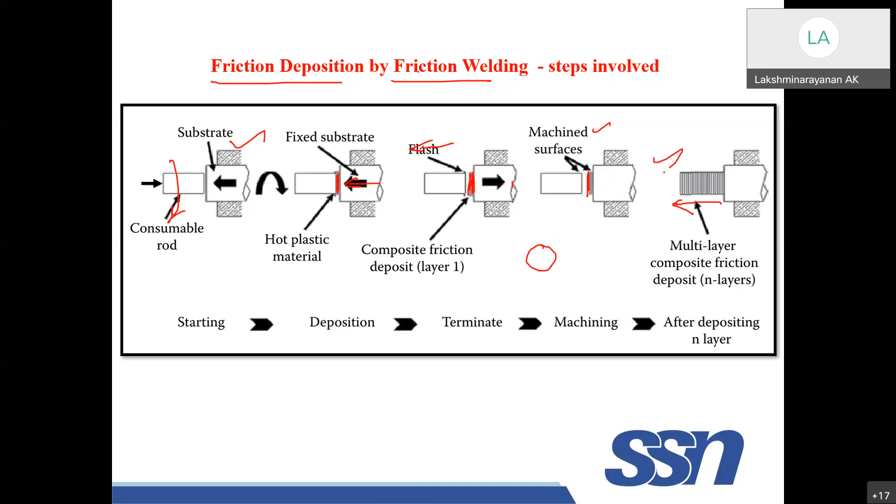So this is restricted to rotary components. One of the disadvantages of this method - this is one of the works by Dilip et al. in 2011 from IIT Madras. You do one layer, two layers, depositing it, and finally they do machining. They take this as the final product.

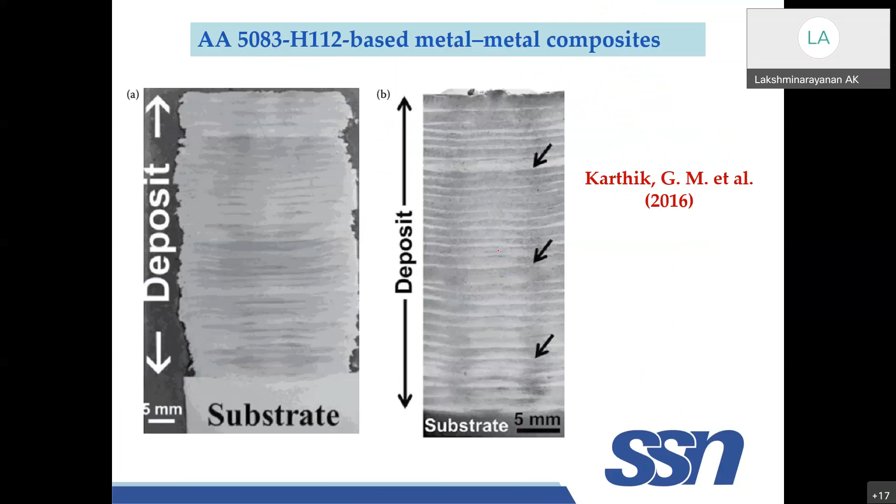This is one method, friction deposition, building layer by layer. This is another work from the same group, but the material is different.

Okay, there is another method, friction surfacing. The video which I have showed, right? One layer you try to deposit by friction layer, try to do some machining, then you deposit other layer, like that you can do that.

Okay, so this is the actual steps involved. This is your substrate, this is your consumable rod. Just apply some force, it is rotating at a particular speed. Your material at the interface with respect to the tool, it is deforming. So once it is plastically deformed, it will be moved and a layer is deposited. This is the first layer.

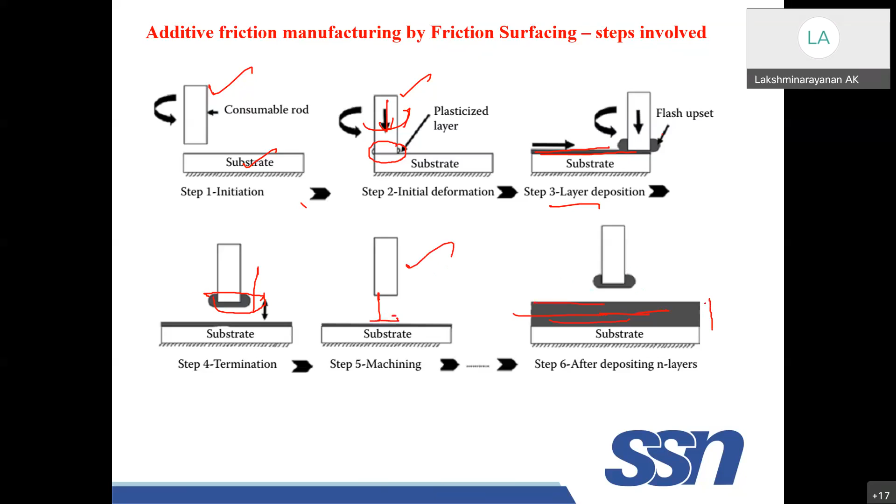Okay, just take this out. You have to remove here also. No, you have to remove this part. Again, deposit it. Like that, you can do multiple layers. Okay, like this. No, you can even change this rod in between. You can

deposit functionally graded material also. That we call it as FGM. Functionally graded material is also possible.

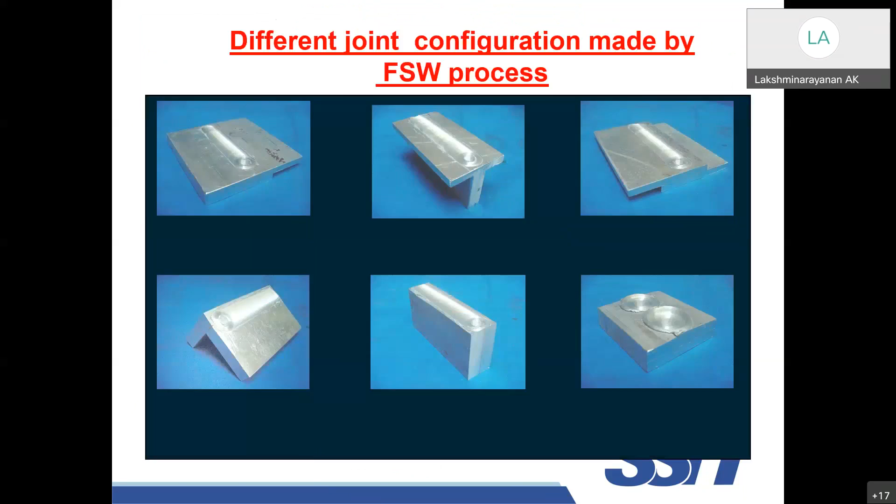I will just skip this because this is not related to this one. I'll just go to friction additive manufacturing. Okay, here no, this is butt joints. As I told you, if you want to join 2 pieces like this configuration also you can try, but various configurations also possible. There is one of the earlier work from Professor Prasad Rao, again from IIT Madras, 2016.

Stack 2 sheets, try to join it. Okay, by lap welding. Okay, again the pin will enter into the joint line at the interface. It will go into the interface and will try to join at the seam weld. If you see the cross section, actually the bonding will be so like that. The bonding will be like this.

Okay, just erase this line. So the bonding will be like this. So once this layer is deposited, this is first plate, this is your second plate. So keep another plate. Okay, keep another plate. Try to weld it here.

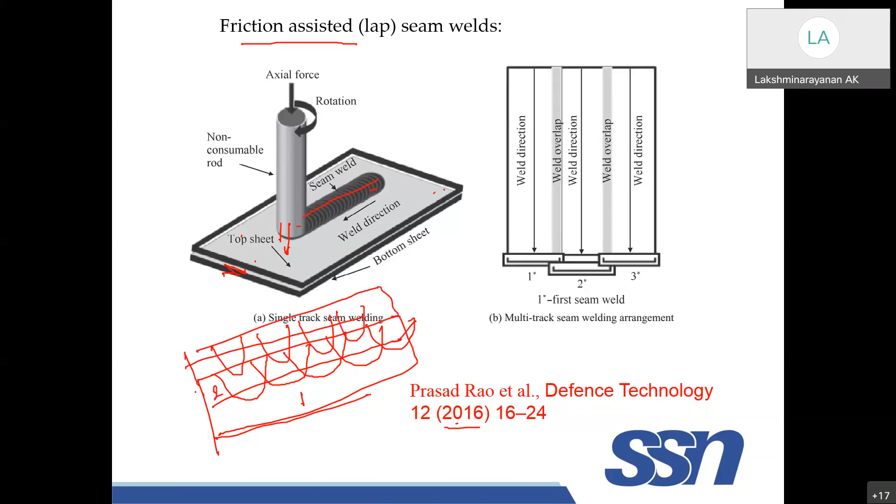Similarly, you can build layer by layer. This is only 2 layers they have done. You can also go for multilayer. In 2017, we have tried.

This base is actually magnesium. Top we try to attach a thin sheet. This is for corrosion. Similarly, you can stack layers. Many layers, if you want, you can stack layer. Even you can change the composition.

Bimetal, I don't want to go in detail about this. The paper is available there, and even you can get it from Google Scholar.

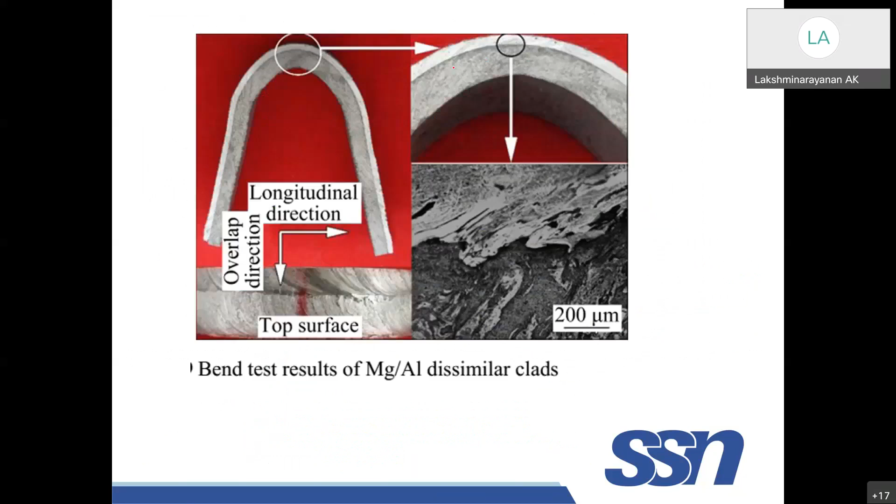Okay, you can see the bend test. Even if you bend test, that is very good without any cracks. Very clean bonding is there.

This is what I told, right? One layer is, this is first layer, second, third, fourth. Okay, just bond it here, bond it here, bond it here. Like that you can go. So if you want to know multiple passes, this way also you can bond.

Okay, all this joint we have fabricated with magnesium alloy, 8 layers, and each layer will have 8 passes. Okay, we have material which we have yet to publish.

Okay, as he asked, right, initial plate preparation and sizing you have to do. Just stack one over the other, do some FSLW run, desired height is achieved. So again, this is the final build. If you decide the height is sufficient, you stop there. Otherwise, just flatten it. They can do it.

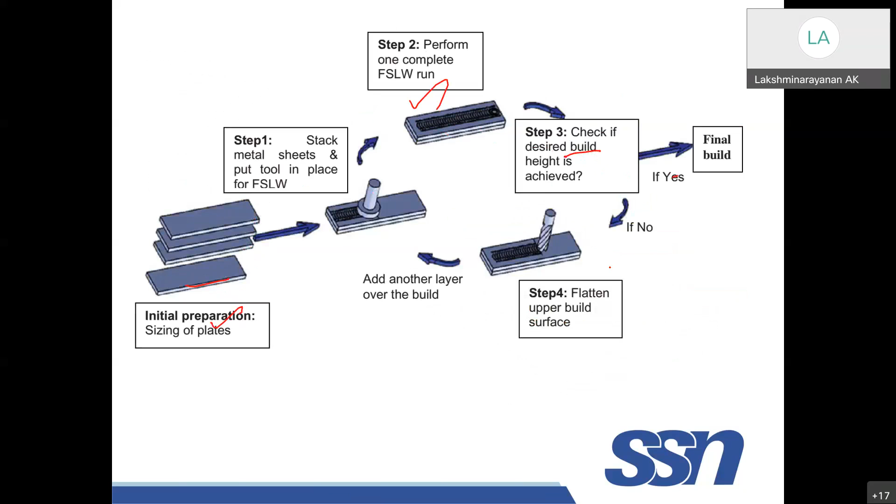This video will show you some of it, if you have any doubts on that. Actually, this is now they are doing FSW.

Any contour shapes, no? If you have a proper fixture and the tool, no, then you will. Now, actually, a milling cutter comes into contact and just removes the surface. You know, some flashes is there. It will remove the material, right?

They will keep another plate. Again, try to do FSW.

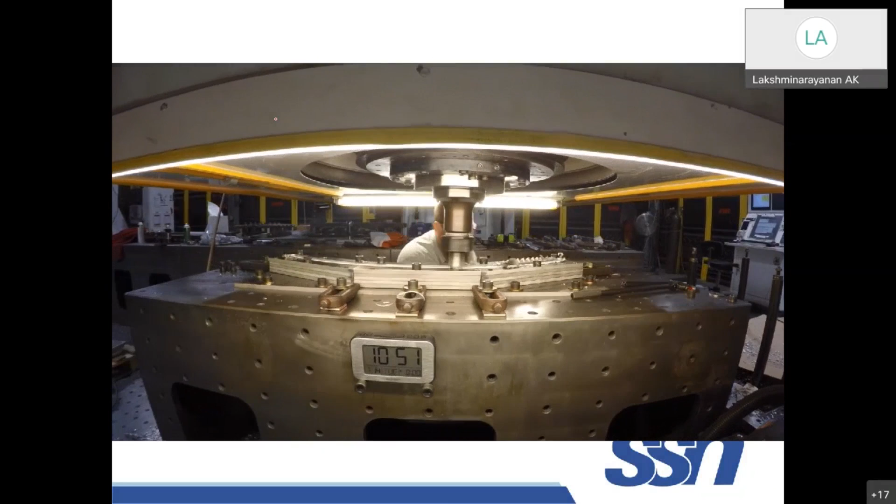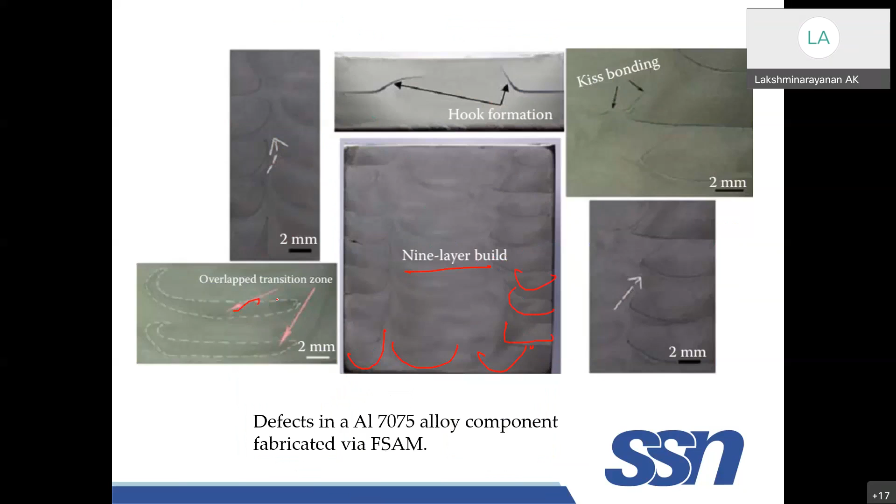Some overlap will be there, transition zones that we have to take care of. You have to control the heat input so that there will not be any problem like a heat affected zone. People have tried this technique with magnesium alloy also. I will just try to help you understand the process. I will skip those, these are the same thing. I want to show some other aspects also because of the time limitation, so I am skipping some of the slides.

Fully gradient, okay. You will start with a particular alloy, and you will change each layer. You will be presenting a different alloying element or different alloy, and you will end up with an entirely different alloy on the other side.

Why do we want to have this? In many applications, you may use only one of the sides. Suppose if this is the parting line, this side, this material will be subjected to high temperature. But this side you may subject the material to only corrosion. This is immersed, the temperature is low. It might be this kind of condition. So you need to have functionally graded materials, or even a gradient structure, because for high temperature application you need one property, and for corrosion resistance you need another property.

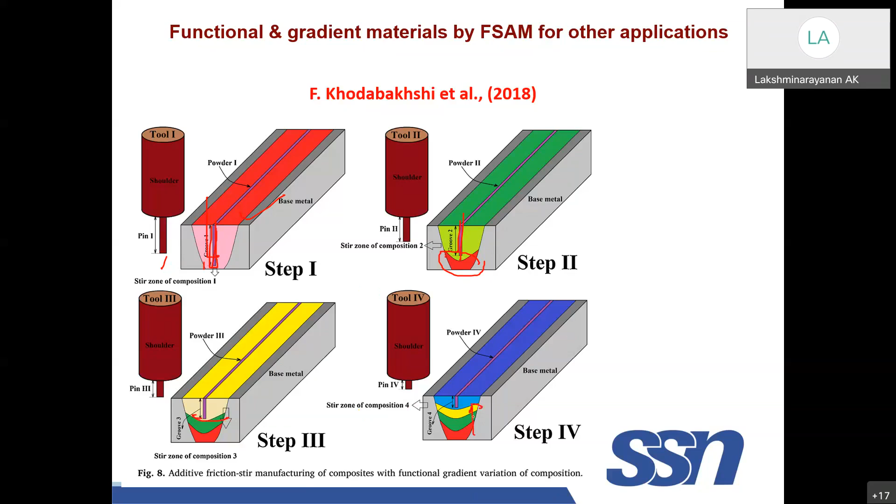And if you consider solid state, you have other systems also. This is one more technique which we are going to see, a very interesting technique. In foreign countries, Western countries, they have already adapted this for manufacturing. This process was invented by Aeroprobe, and now it's popularly used by Meld company also.

So here there is a tool which has a hollow portion. What we can do is send the powder, or the feedstock may be powder or sometimes a solid wire. We send this wire through this hole, and the tool rotates similar to the FSW process, and the powder is deposited. This is called additive friction stir, additive friction stir deposition, very popular. The rod or powder forms the deposit, and you can see here very fine grains.

In case of, you can also use ultrasonic vibration. Say this is a roller, you are sending a feed foil. So when it goes inside, because of this vibration -- the ultrasonic principle is, suppose this is one of your surfaces, and you have another surface like this, so you have peaks and valleys, right? When you vibrate it, what will happen? These peaks will get collapsed.

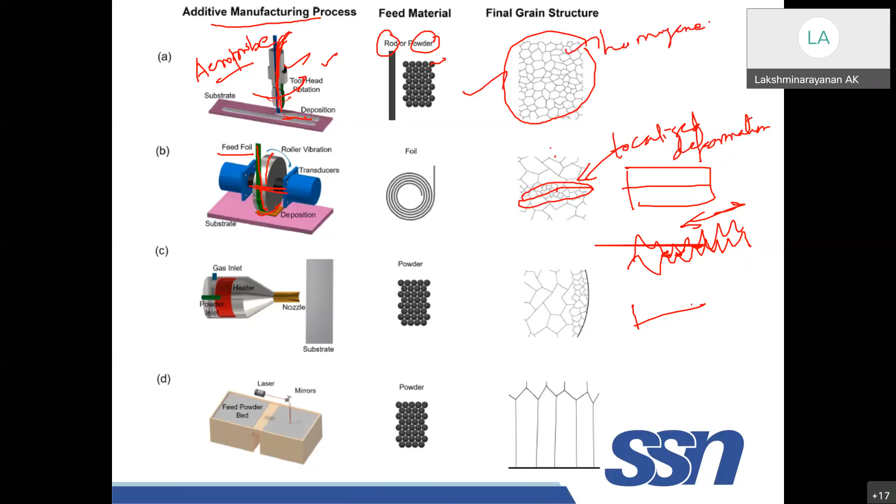There are several other techniques, I don't want to go into detail about that. This technique is very useful to print 3D components. The deposition rate is also very good, and material loss is also very less. So this is a substrate. As I told you, this is a hollow tool through which I am feeding the material.

You can just control the path. You can even deposit circular cylinders, 6-inch OD, of aluminium 6061 medium strength alloy.

As I mentioned, this was patented by Aeroprobe. One of my friends, Dr. Kumar Kandasamy, was with IISc Bangalore, then he worked at Aeroprobe. He patented it - it was invented by an Indian, but it's a US patent because he worked there at Aeroprobe.

So continuously you can deposit this kind of material. This is much better when you consider friction stir additive manufacturing. You can see hollow, just feed this wire, try to deposit it. I will show some videos so that your understanding will be better.

Some of the benefits: this is a non-beam process. We don't have any laser beam, electron beam, or even plasma beam. Hence no melting is involved. This is a solid state process. Energy associated is very less. Cost is also very less.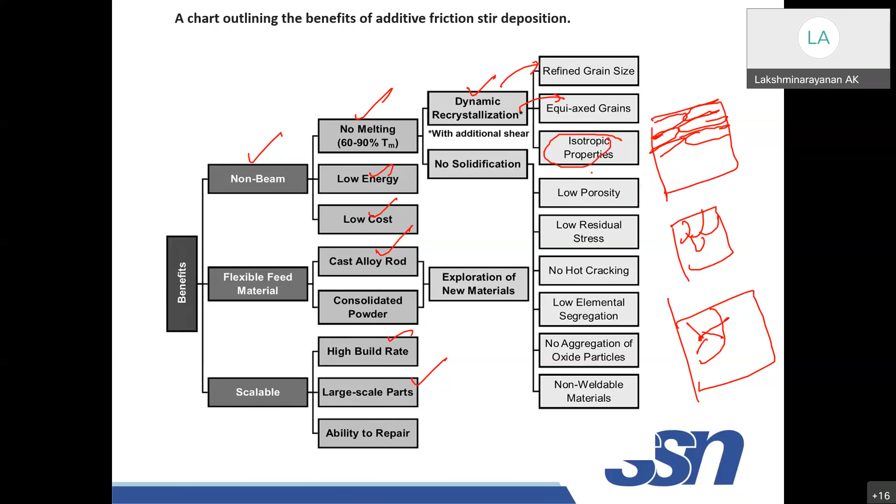The property will be isotropic because it is not localized deformation, it is bulk deformation. So the property will be isotropic. No solidification means porosity is reduced, residual stress is very less. Hot cracking tendency is not there because of solid state processing, so elemental segregation is also not there. That's why you can try different exotic materials with this process.

This is how it works. You have a hollow cylinder, inside you have a screw which is rotating at a different speed. Whatever particles are fed get forced through to pass through this path. There is a gap, and this is also rotating. Because of that there will be frictional heat generation, it will go to plastic state, and it will be deposited layer by layer - one layer, two layer, three, like that it will go, with different layers to deposit.

From powders, machined chips also you can deposit. That is one of the very important recycling concepts - especially, as I told at the beginning, magnesium chips. If you want to recycle it, you can still be able to recycle it by this method.

5083 alloy, building industries are using this. You can see the grain structure - very refined grains and equiaxed structure you are able to get.

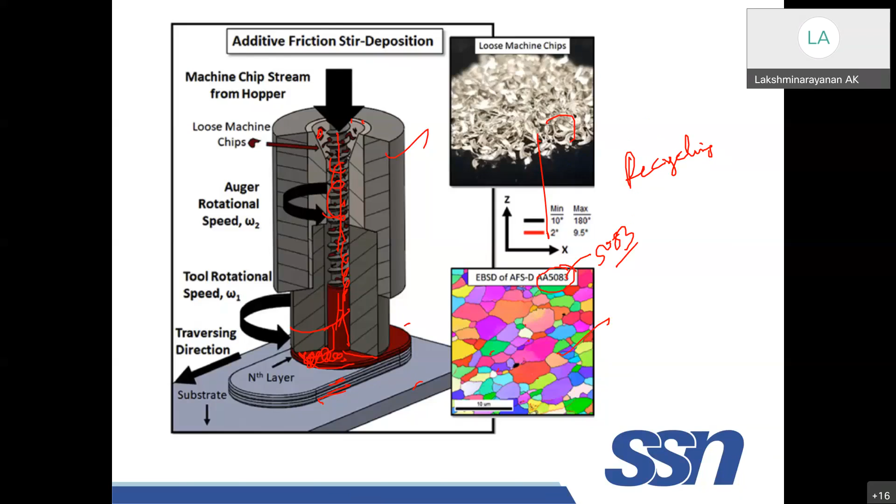This is the process, just you can watch this. You might need some machining on the sides, but it's a very fast process, a solid state process, very important.

It's mentioned - you see how clean this is. You are not able to see any radiation, there is no arc, fumes are not there. So that is one of the advantages of this process. This is an environment friendly process.

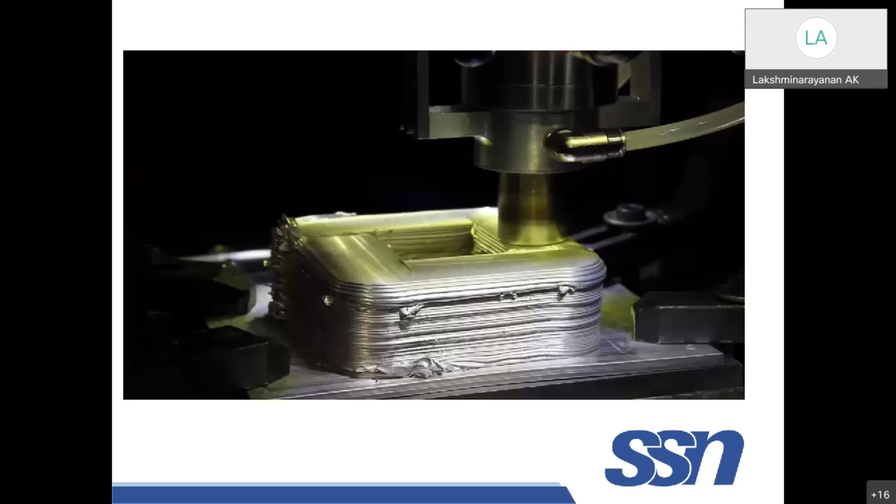But we need the machines. In India, there are no machines available right now, to my knowledge. So in future, we will also work towards this process.

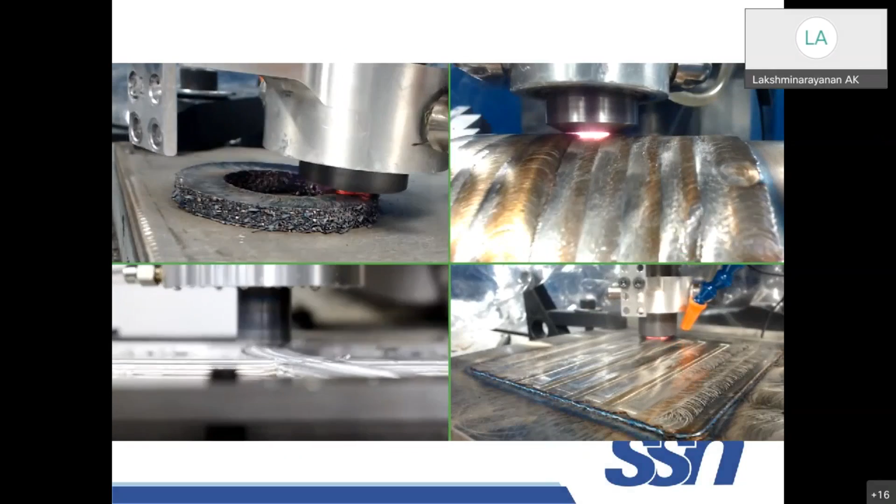So these are various materials, even in circular form or cylindrical deposition. Suppose if you have a cylindrical section and want to improve the surface properties, you can still do that, as in the right top corner. In the bottom left one, stringers - especially these stringers, if you cast and do machining, there's a lot of waste - from 200 kg down to 18 kg, as they mentioned.

These stringers, if you fabricate within 18 kg, will finish the structure. But when you do machining, casting and machining, you always need to use a large amount of material. That is also one of the drawbacks. And as I mentioned, the grain structure is very, very important.

You can even use bimetallic tubes, or dimetallic cylinders. So inside, this first layer is a different material. Suppose this is aluminum, this layer is magnesium. You can also reverse it. Even both sides can have aluminum, with magnesium in between, thin layers of aluminum on both sides and magnesium on the outer sides. That leads to weight reduction, and also the corrosion resistance of the magnesium alloy is protected. So these are some of the problems people still want to explore.

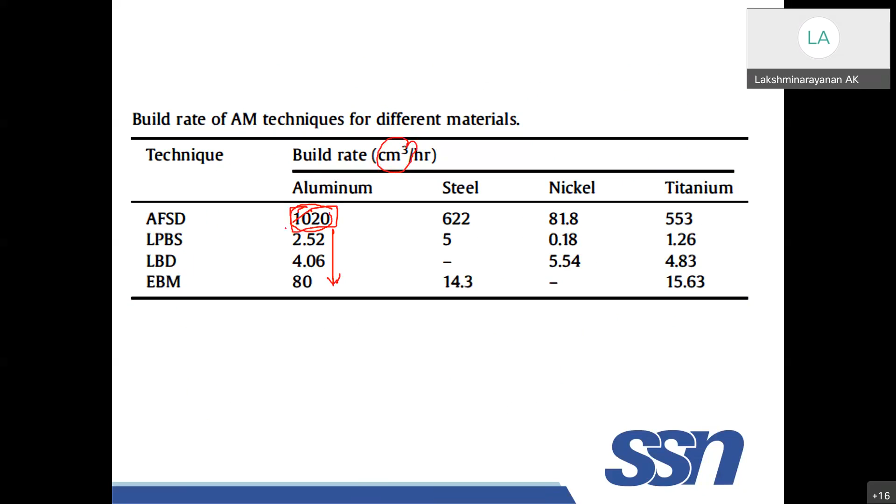If you see the build rates, just imagine the build rate of aluminum - it is around 1020 centimeter cube per hour. Whereas if you check other processes, how much faster you can fabricate the component. So this process still needs work - plenty of work needs to be done.

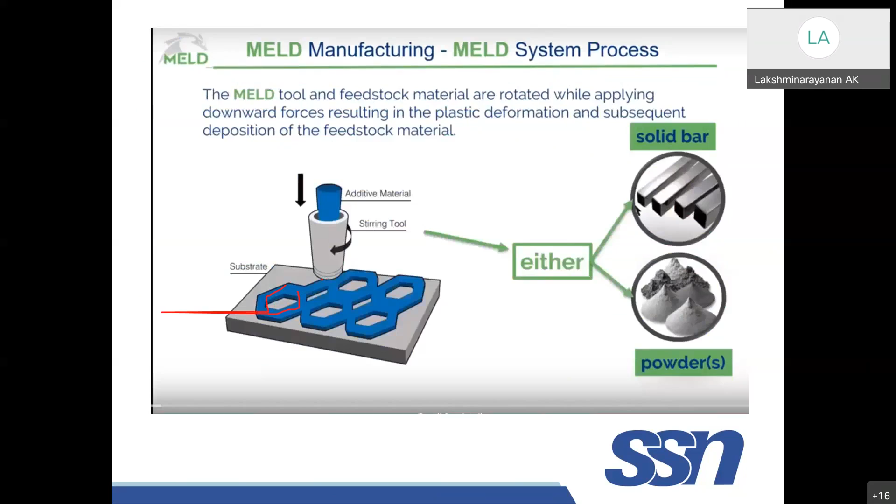This company Meld is fabricating this kind of porous structure also. Continuously, if you build, you can build foams also - that is one of the other applications. There is one more material called auxetic material with negative Poisson's ratio. That is also possible by this method.

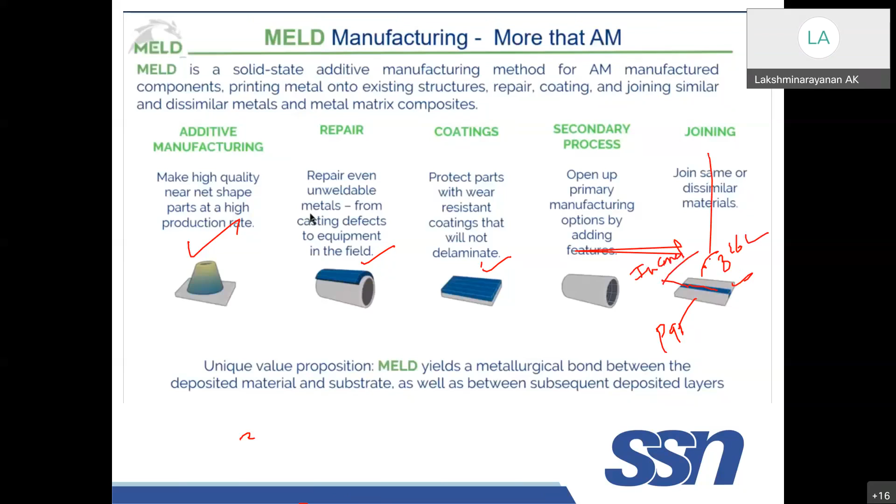You can build a component like this, or if you want to do repair work, you can do that. Coating is still possible - as I mentioned, aluminum-magnesium combination, copper-stainless steel combination, or even dissimilar materials. Sometimes in between you need a compatible method, because if this side is P91 and that side is 316, in between you can put Inconel transition joints. By this method it is still very useful, so we have to try that also.

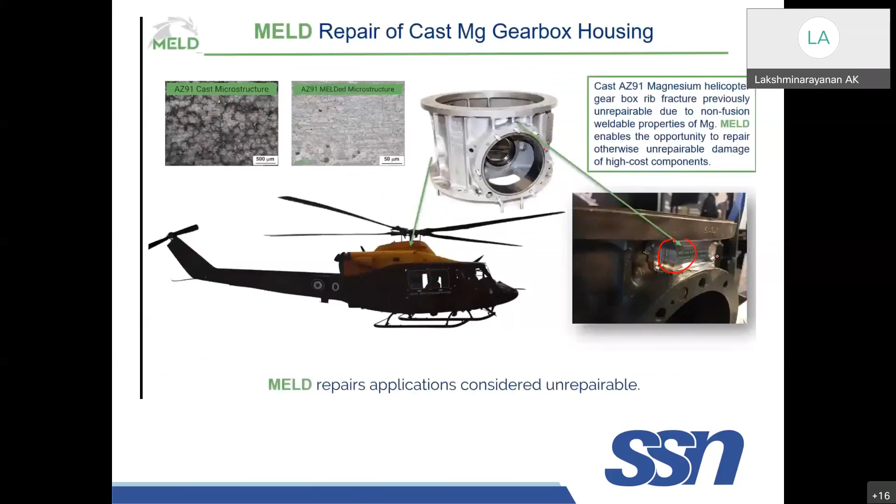Some examples for you to understand - I'll just skip this because of time limitation, I'll quickly rush through these slides. You see here how they are building the component now. Even repair work - most of the time this kind of rib fracture occurs, these ribs get fractured. That can be repaired - the ribs, even if fractured, you can just repair it by depositing material using this technique. People have demonstrated it.

This location of worn surface - try to solve this by just depositing material there. This is what I told you. If you want to improve the surface finish, this is also something you can do.

This is another area where nickel aluminum bronze is used in ship propellers. This material is subjected to erosion and corrosion, in an erosive and corrosive environment. Why? Because this material is in sea water, which is a salt solution, and sand particles have contact with it - when it rotates, sand particles interact with the surface and damage the passive film, and the corrosive environment interacts further, leading to a lot of corrosion. So erosion, corrosion, cavitation erosion - those are the problems for this material.

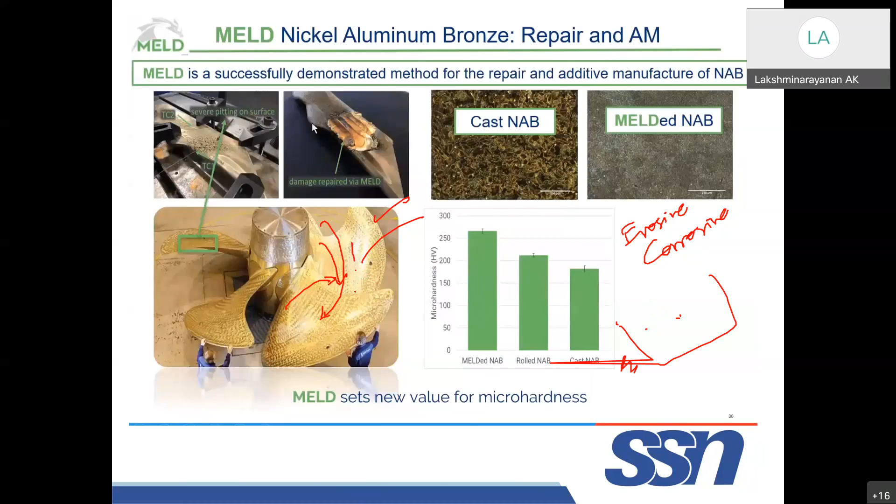So suppose this is a very big structure - we cannot just throw it away if we have a crack here. So we have to do repair work. That is possible - you see here damaged areas, you can just do repair work by this method. That is also one of the other advantages.

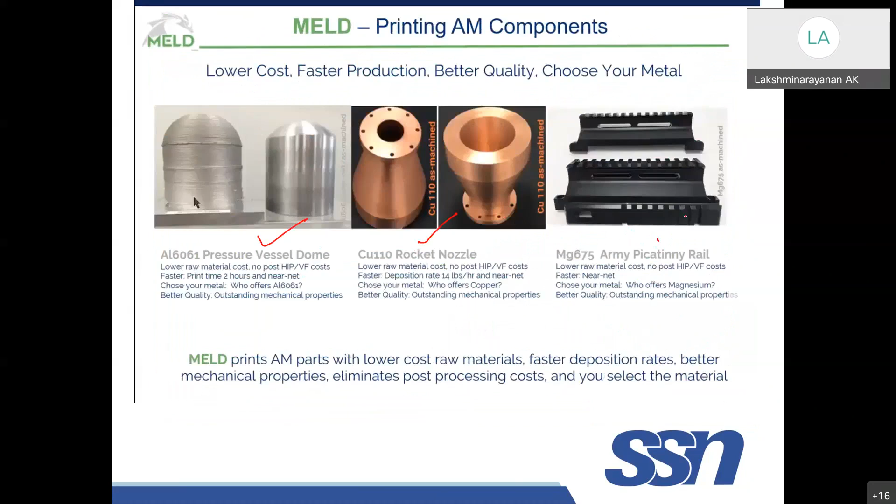You can see some of the other products: pressure vessel dome and rocket nozzle. This is the Army rail. These are some of the proposed applications. You can see a video on YouTube - I just took it from that. You just go through that.

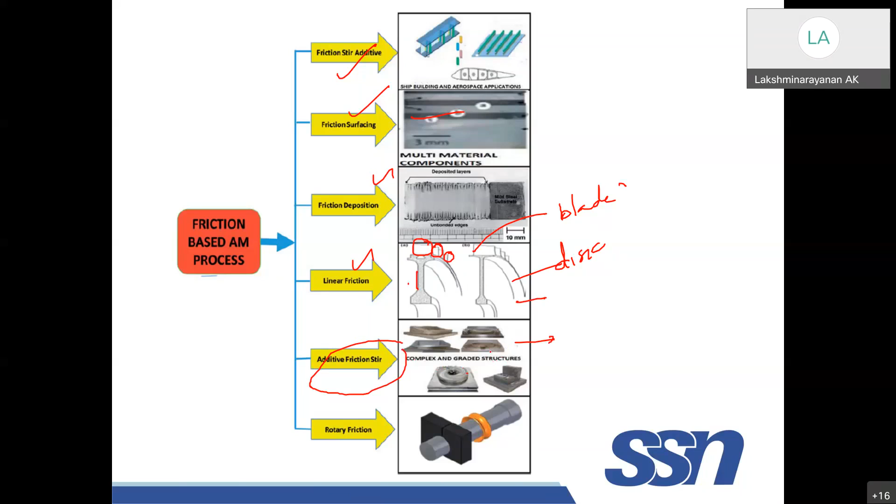To summarize solid state processes: you can use friction stir, friction surfacing by consumable rod, friction deposit by just rotating tools, or you can attach the blade to the disc. This is a popular process, especially in applications like gas turbines. Additive friction stir welding is very popular nowadays, with a lot of potential, especially for soft materials like aluminum, copper, and even dissimilar materials. That's it from my side. Thank you very much. I would like to have some questions or interaction so that I can share more.

Thank you very much. I thank the organizers for inviting me to share my experience, as well as some of the data available in the literature on metal additive manufacturing. Thank you very much.

Thank you so much, Lakshminarayanan sir. It was really a very good session. We would definitely like to take a few queries, if any. Any participants having any queries may ask. So one thing I would like to ask.

There is a lot of heat involved in these processes, right? So how do we overcome all those residual stresses due to continuous heating and cooling? That is why I told you, sir, you can use some kind of cooling arrangement. One thing is gas cooling at the trailing gases you have to use. That will solve two purposes: one is it will avoid oxidation, and the other is it will cool the metal which is already deposited.

That is one way you can do that. Or, as in one more video I have shown, the rolling - you have to control the heat input by process parameters initially. Most of the literature mentions that though there are overlap areas, it is not affected like in the case of welding, where you may see heat affected zones. Whatever literature is available, and from our own work, we are not able to see a heat affected zone, though there is an overlap region.